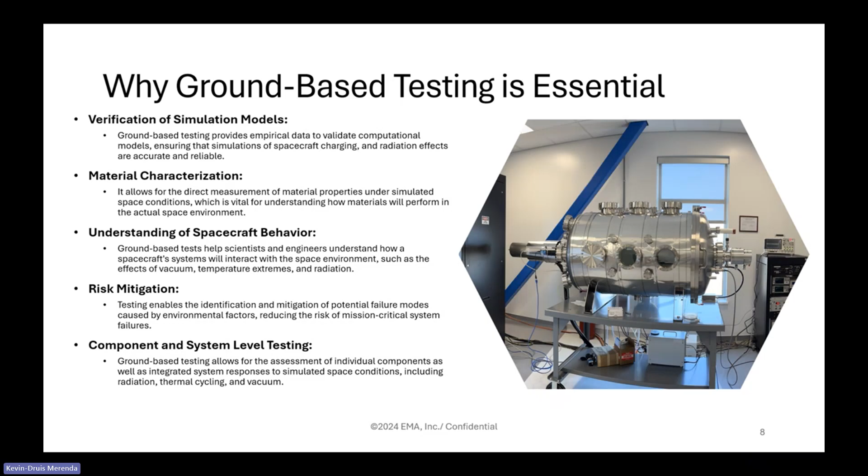There is a cost effectiveness to testing. We know that if we do it in a very specific way, we can assure a certain safety standard, we can comply with regulatory demands, and there's various development strategies that can be done for mitigating the consequences of some of the testing that we have.

So enhancing reliability is key, but it is costly in some way to try to change the design and go back to a test campaign and shine some more particles onto the system and understand how radiation hardening needs to be mitigated.

So that's where I think simulation can become very handy, right? Instead of having testing campaigns of the order of $500,000, we may be able to just do simulation campaigns for $50,000. And that helps us significantly really refine the testing cost of these campaigns and making sure the device can become reliable quickly.

So the key to simulation is that we don't have any limitations on the sample size. We're not destroying the device. We can shine any particles that may be very hard to access in a test facility.

Maybe some test facilities don't even have the radiation environment that you need to be able to test for. Simulation really helps you run all these different types of exposures: long duration, short duration, electromagnetic effects, photons, things like that. Understanding these makes simulation very powerful.

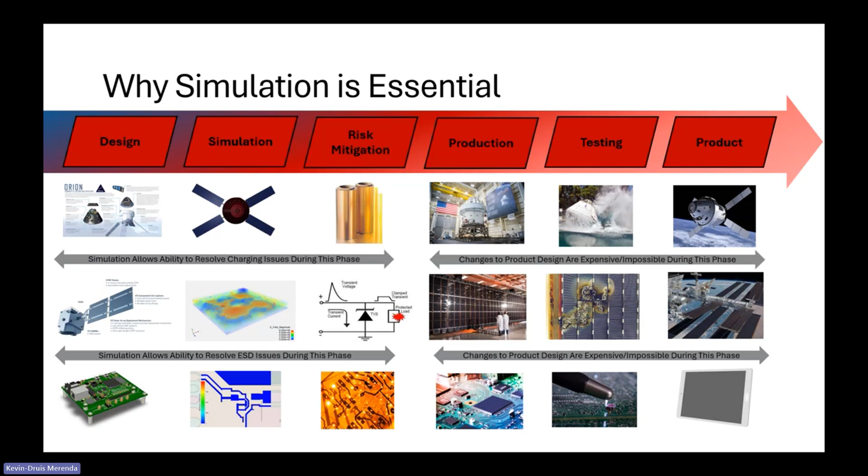This is important if an astronaut is static charged and touching some of the devices, and wants to understand and make sure there aren't any issues under ESD and things like that. So there's a lot that the tool can do to help us solve some of our concerns.

You're probably by this time already very familiar with our partnership with Ansys. Our two tools are distributed through Ansys EMC Plus and Ansys Charge Plus. Ansys Charge Plus is the tool that's really focused on doing this multi-physics of high energy radiation and coupling that to an electromagnetic solver if needed.

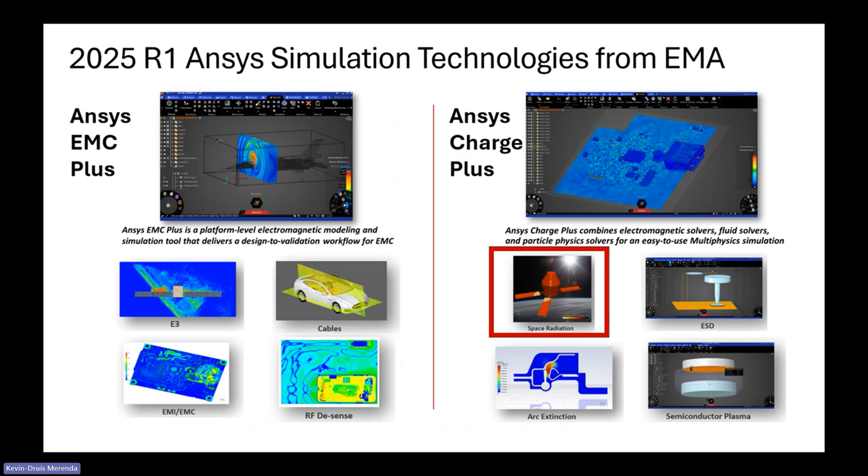This is where the concept of spacecraft charging comes in. We can model the elementary particle physics associated with that high energy space environment, but we can also couple it to electromagnetics to understand the consequences of that higher energy radiation with various components like electronic devices, currents on cables, and fields building up in enclosures exposed to various radiation environments. Being able to have that coupling is key, and this is what the tool was developed for.

One of the things we really wanted to do, because of our very powerful integration with this elementary particle physics, was work very hard at disentangling the FEM and the elementary particle physics so users can run radiation hardening simulations without having to handle the overhead of the electromagnetic solver as well. Even though it's still there as of 25R1 and 25R2 this year, you're now really able to run the radiation transport code on its own, independently from the electromagnetic solver.

That helps us not have as simplified of geometry, as cleaned up meshes, things like that. We have ways to create, as you'll see today, meshes very efficiently and be able to run the radiation transport on much more complex geometries than maybe we were able to do in the past. So it is a multi-physics solution.

You'll find Ansys Charge Plus inside the Discovery tool. You'll see that we have all the tools for prepping the geometry, which is really very important when you get a CAD from your mechanical team. You want to be able to use that quickly, assign materials. All this is doable in the tool, but then also prepping it for simulation is key.

By partnering with Discovery here and having our tool within Discovery, we're really able to leverage that technology efficiently. Some of the cleaning up tools are very mind-blowing and speed up the workflows tremendously in terms of getting simulations ready to go for rad-hard analyses.

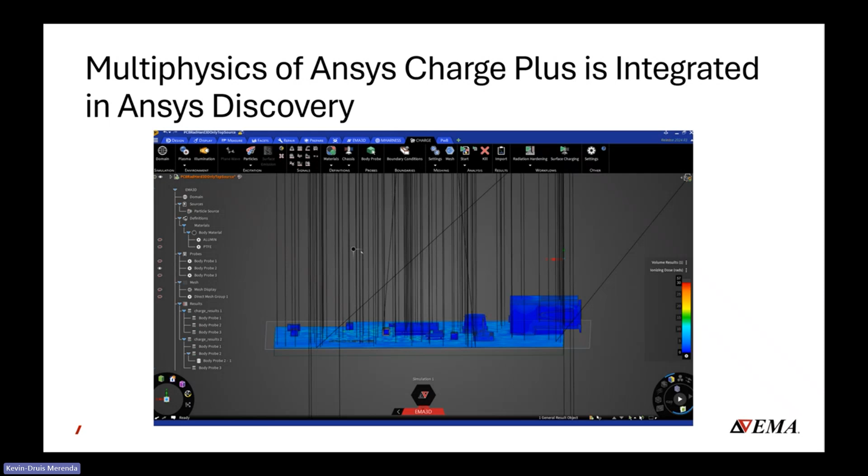Then you go and navigate to the Charge tab, and there you get access to being able to set up many different types of simulations. We have, as you'll see today, the ability to just select the rad-hard simulation workflow, which will really streamline and run the radiation transport code on its own with the new probes that we have incorporated inside the tool.

As always, we have documentation available. We're working very hard to make sure that all the overlay help you get using F1 is updated and very useful for this latest release, especially with all the new tools that are coming. We want to make sure we provide all the help that is needed for you to take on the tool and learn it on your own.

There is a lot in Ansys Charge Plus, so even though you may be using the tool specifically for rad-hard, just keep in mind that there's a lot of other technology inside the tool, and rad-hard problems can become as hard as you want to make them, right?

So if you try to understand how, for example, a photon pulse from terrestrial gamma ray flashes of lightning interacts with an enclosure on a spacecraft, it's going to be much more complicated than just running a pulse of photons from that TGF.

It's going to be coming from, there's going to be aspects of it that create electromagnetic fields. There's going to be gases in your electronics box that you may be considering, because there's plasma forming around the box and inside the box that is redistributing itself based on the fields within imparted by the box, and that will change the whole charging aspect of the components within the box.

And so being able to think of various ways to couple all this physics together is important. It's not easy, but it is doable, right?

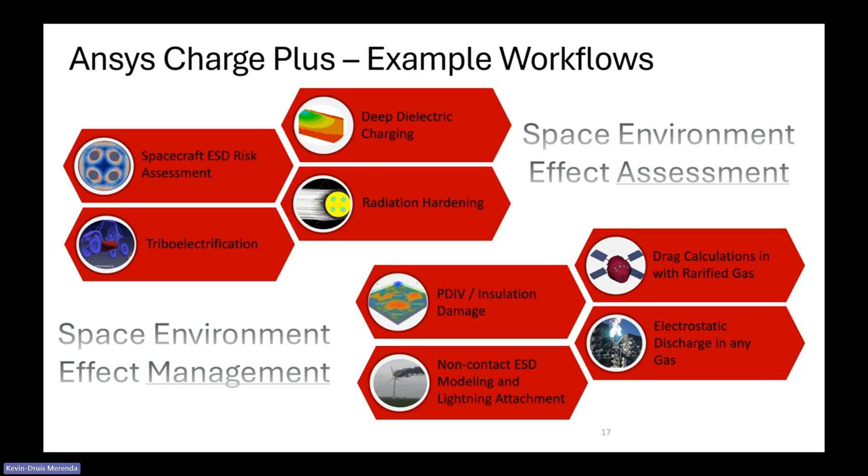How long is it lasting? Are we going to get combustion out of it? Is it going to lead to a full failure? If you need to go that far to make some analysis, we can help with charge as well. Not just assessing if the fields are too high, we can go all the way to modeling the event of the damage as well.

So let me do a little bit of a deeper dive into the difference between radiation hardening and internal charging in Charge Plus. Okay, so the two tools that we're using for internal charging are FEM, electromagnetics.

We have a full wave and a quasi-static solver. Typically for those internal charging problems, we're using the quasi-static solver. And then we have the Monte Carlo transport, which is an interface for G4. Geant4 is a tool that was built at CERN.

It is very well vetted. It's got a lot of different packages based on the physics that you want to retain, based on some new acceleration schemes, or other things present in the tool. And we interface with those packages and can bring them in.

We provide a full CAD interface to run G4 simulation with all the cleaning tools and meshing capabilities, and all the fundamental physics of the electromagnetic interactions of particles with bulk materials are captured in the tool.

We can also use G4 for much more advanced ion interactions and ion particles for the galactic cosmic ray spectrum. This is key, because all the physics of neutron interactions is also captured inside G4. So now we have this inside the tool.

We have a way to couple that information to the electromagnetic solver. Every track that stops inside the mesh will leave a certain amount of charge behind, and we can seed the electromagnetic solver with that charge at any location in 3D. This is how we can charge up any dielectric. We can understand how gases, for example, are charging up due to the radiation transport. There's a lot of powerful things to do.

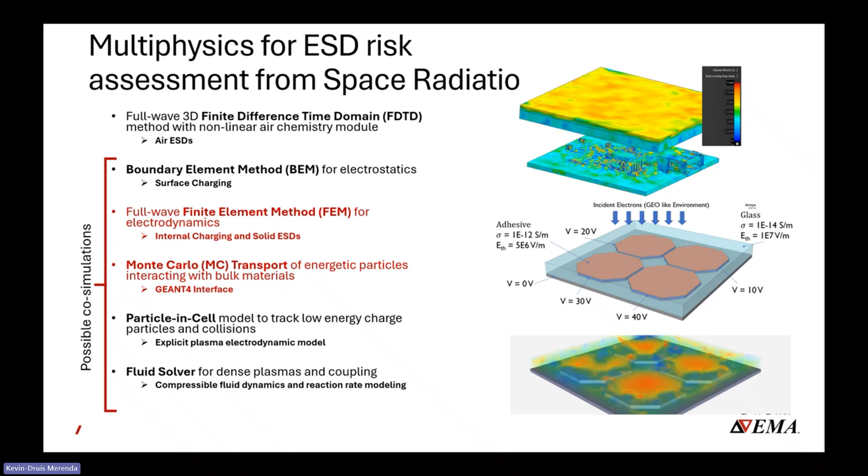For rad-hard specifically, it became important to realize that forward Monte Carlo was not the only way to do rad-hard. There was another tool that is very popular and necessary to do analyses much quicker - the ray tracing solver, ray tracing sector analysis, that we're talking about.

This is doing an analysis, and we'll get a lot more details on how this works from Colin in a second. We are looking at a point on the PCB, and shooting rays across the whole geometry to effectively get the total amount of shielding around the system, all the way to the space environment. Then we apply what's called a dose depth curve, which is a pre-calculated ionizing dose value as a function of thickness of shielding material.

Once you apply that to the system, we can extract very rapidly the ionizing dose all the way down to any parts of a system. But that dose depth curve needs to be generated in the first place, and this is where Monte Carlo particle physics comes in, because it's very important to capture all the physics of that process.

However, there are some assumptions made when you create those dose depth curves. First of all, typically it's done with full aluminum stack-ups, and it's very different when you have materials with different Z numbers ordered differently as well. The true dose depth curve of a problem might not be exactly what you'd get if you were running a full Monte Carlo transport problem.

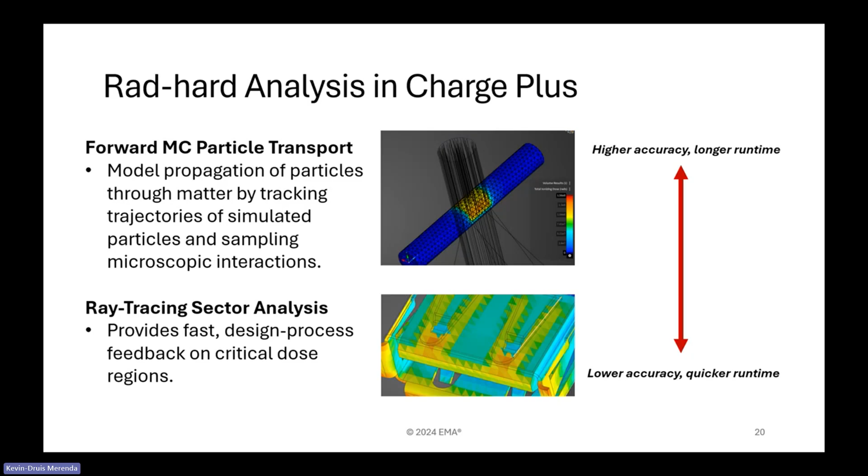It could be non-ionizing dose. It could be done with other types of particles, electrons and protons. As long as you generate that dose depth curve, you can go ahead and use it for the ray tracing sector analysis. But it's a very quick workflow, and a lot of customers are just provided with those dose depth curves to do the analyses and the rad hardening of the PCB. This is a method that is very powerful to get that done.

So very simple, let's start with an electronics box. I promise it's going to get a lot more exciting when Colin takes over, but just for concepts, on how things are working: radiation hardening versus internal charging.

This is a 1 millimeter aluminum shielding box. It has vacuum on the inside, and then it has a PCB board on the inside, just a simple dielectric slab. In this case, I used PTFE. The concept is the same based on the different wall sizes, based on the mesh that we're using. Everything we're about to do is about showing you how radiation works with respect to electromagnetics.

On the left here, we're showing a couple electron tracks, about 1,000 of them, that are shining onto the top of the box. These electrons have a certain energy spectrum. With the Monte Carlo technique, we are sampling from that energy spectrum, and we're sampling the spatial distribution of the source, and applying this onto the system. You need enough statistics to get enough correct information at the bottom. This is by principle what Monte Carlo looks like.

In this case, this is a 4-hour transit in the radiation belts, and we took the energy spectrum from that environment. Here you're seeing a lot of byproducts from that source. You can see that some of the electrons are stopping directly in the shield. Some of them are creating secondary electrons that are making it all the way to the PCB. Then in blue, you actually have photons that are generated as well, and these photons will themselves have enough energy to create some more complex physics. You can see that on the right as an additional track. This will ultimately deposit charge on the box and deposit charge on the PCB.

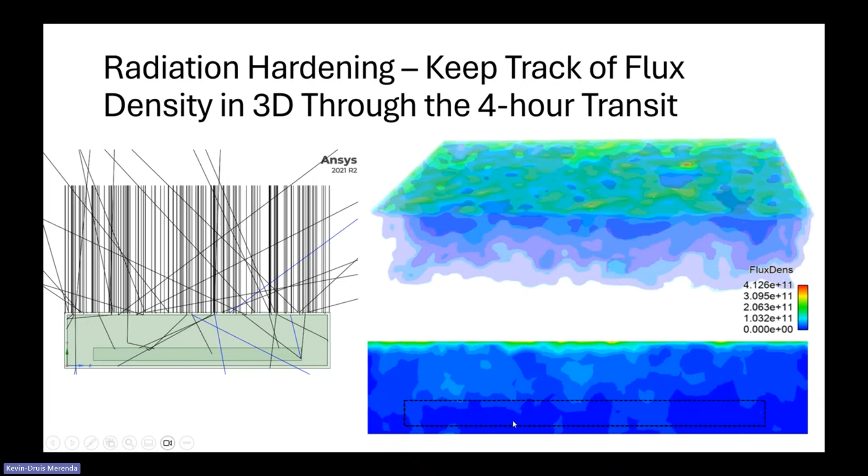You can see a cloud of secondary particles on the inside in blue and purple. On the top is a 3D transparent view, and on the bottom you have an actual slice cross-section of the whole box with the PCB on the inside. So the PCB even adds an additional layer of screening. You can see that we're not really getting any light blue in the PCB itself, and this is due to the fact that the PTFE in the plastic is there and can do additional screening and absorption of the charge.

And you'll see a lot of that in some of what we're going to be showing later in the demo.

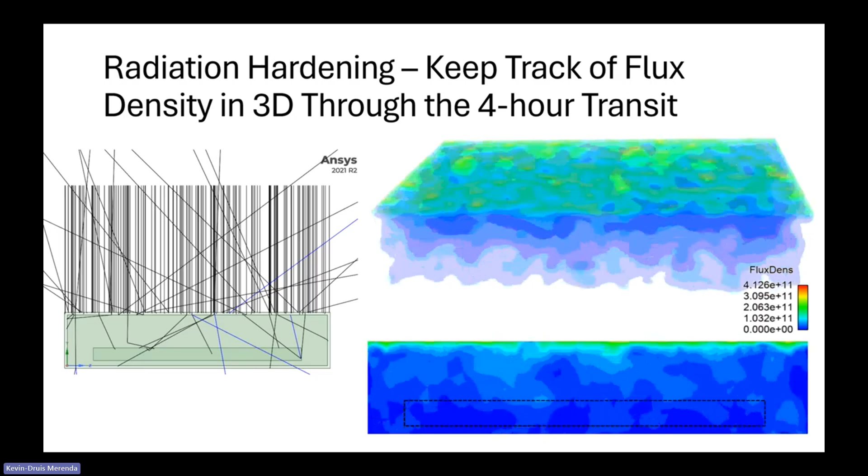Ultimately, with the rad-hard capability, we are calculating dose, just joules per kilo. So we know for each event in our Monte Carlo simulation what energy was deposited on the slab. For typical rad-hard analyses, what we really care about is the total dose for that component. Here, it's the total dose for that PCB, but you could have a separate body on the component itself. And that will tell you if you are within those thresholds that you need to match the standards.

This is showing and breaking this up into pieces where we're really looking at each electron event and the secondaries, making and depositing various levels of energy across the component. This is the fine detail that we extract to actually be able to apply charge to our electromagnetic solver.

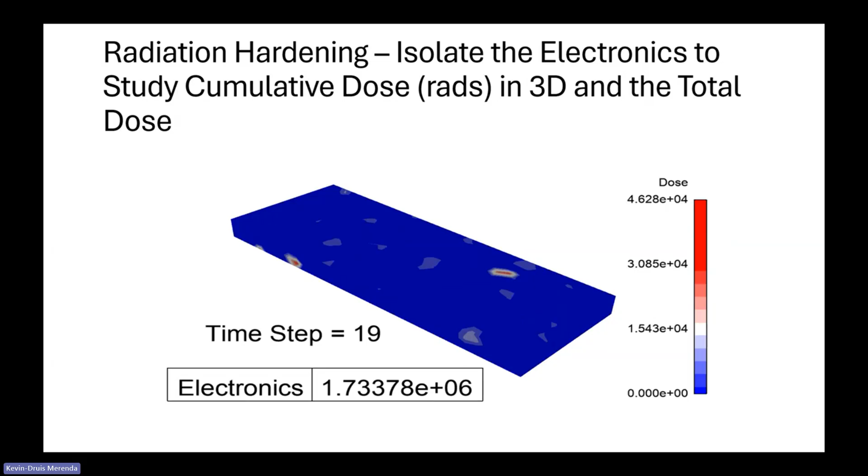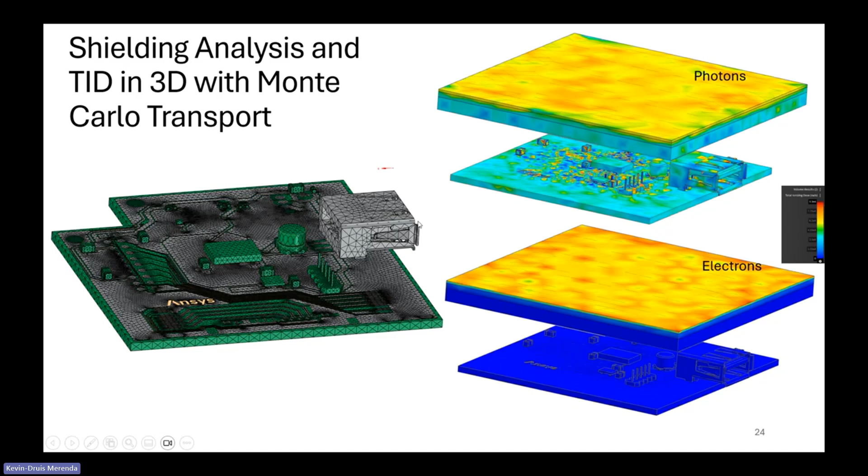Obviously we can do this with much more advanced geometries. You can add additional shieldings, thin layers, things like that. And based on photons versus electrons, you're going to have different levels of radiation reaching the components underneath. In this case, electrons are shielded by this slab in the stack-up, while photons are actually making it straight through to the PCB.

We have various probes to average the information we just talked about. Instead of having it represented in 3D, you can create a body probe and extract that information per body so that you get the actual total dose deposited in the system.

So when we go to electromagnetics, now we have to start considering the spacecraft charging aspects of things and the consequences in terms of E-fields.

As a simple example, we're looking here at a stepped shield. The thickness of the shield is increasing, and as it's increasing, you're getting less charge deposited inside the dielectric underneath. We're setting electromagnetic boundary conditions such that you have a 0-volt ground at the bottom, and the charge is deposited inside the dielectric, and we're seeing the fields build up in various parts of it. This will keep charging, right? This dielectric has a very low conductivity, so there's no way for that charge to dissipate, and you may be reaching thresholds high enough to create breakdown inside the system.

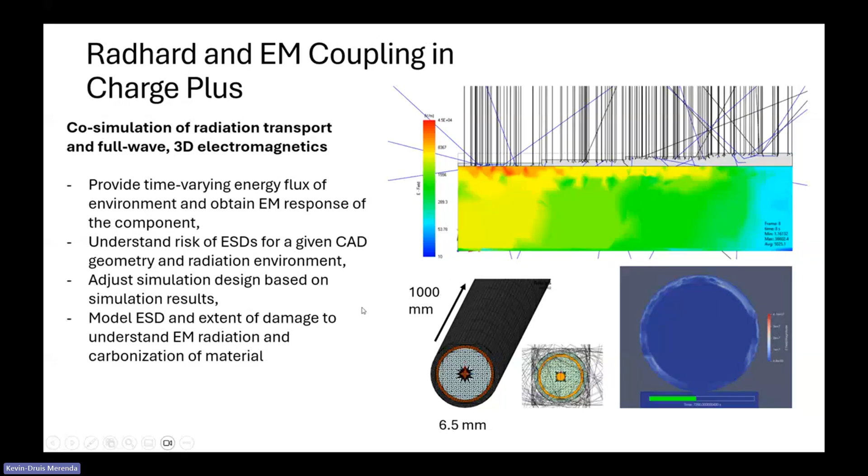So back to our box, what does it look like over time? Here we're looking at the fields building up inside the box due to radiation depositing at the upper layer. And then we can see the charge density in our electromagnetic solver as well, so you can see all the negative charge from the electrons and the image charges building up based on the grounding scheme you have. These fields can actually be coupled back to the radiation transport because the fields themselves might screen the interaction processes within the box.

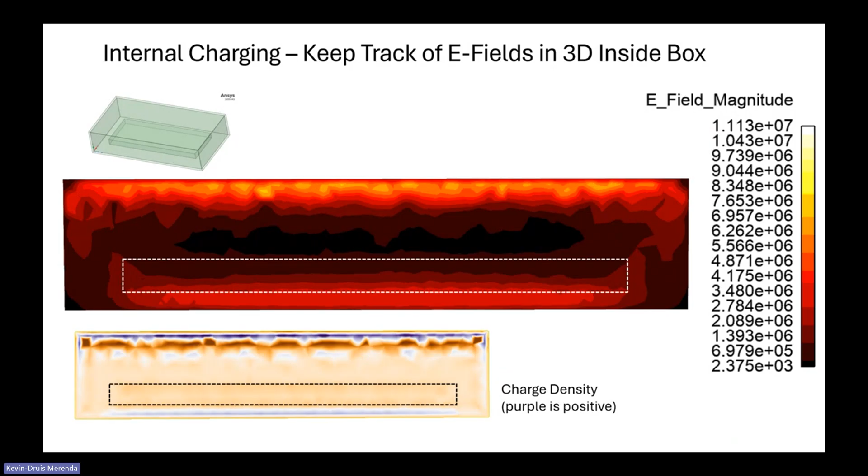The time is very long here in this case, so you may not have the transients on the PCBs, but there's a lot of things to consider in terms of the consequences on the box.

One thing that's important is how do we get these environments? I'm almost going to pass the baton over to Colin - I'm almost done. Those environments can be done from standards.

There are also databases like IRENE that you can use. But a lot of these tools are already accessible within a product called Ansys STK, and STK-SEET specifically, one of the modules within the tool. We've integrated our tool to be able to read in the energy spectrum of electrons and protons from STK-SEET, which makes it a very streamlined workflow, as you'll see today.

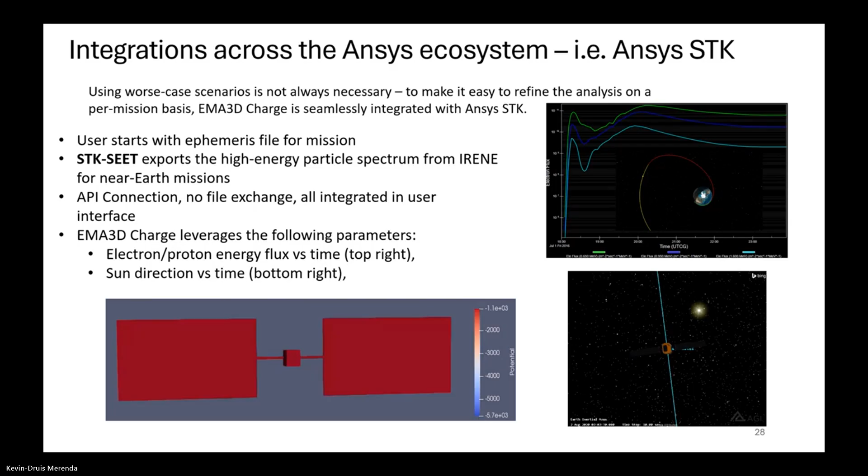I will skip this and let Colin show you a live demo of the process.

I just want to stress that what we're going to be focusing on today is a comparison between our new ray tracing solver that we released within the last year and the full Monte Carlo. The ray tracing solution is very powerful. It is developed on NVIDIA GPUs only, using OptiX libraries made for ray tracing, the same as NVIDIA GPUs use for gaming and ray tracing. So we can run these simulations as quickly as ever. It's a very exciting technology, a quick and easy way to get ionizing dose on any type of complex geometry. So with all that, I'll hand it over to Colin.

Thank you, Kevin. All right, I'll just go ahead and bring this onto the screen. I have some live demo material prepared for us to walk through.

To give a bit of an overview, some of this background has already been discussed, but I'm going to give some context into how the space radiation environment can impact engineering design, in this case for electrical enclosures, and do some deep dive into our capabilities in Charge Plus and our upcoming product Shield Plus for assessing radiation shielding and dose for those types of engineering problems.

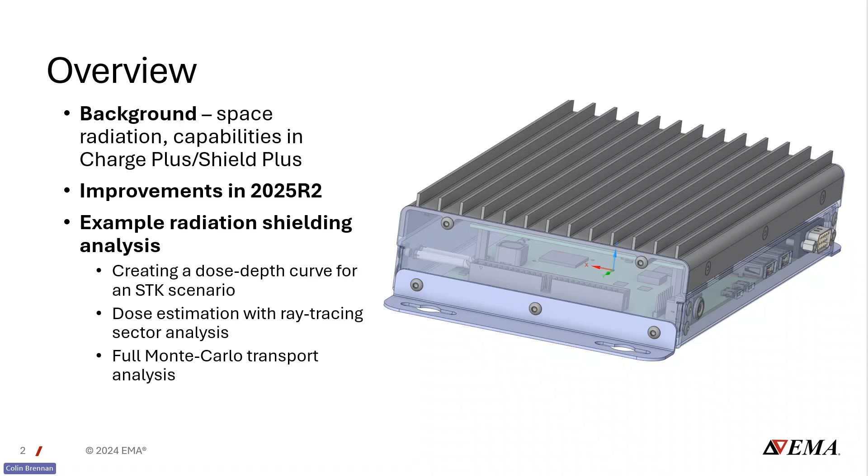Just a quick background, not to belabor the point since it'll be discussed more elsewhere in Expo, and probably a familiar topic to the people in attendance: space is a very hostile radiation environment. There are cosmic rays emitted from distant processes like supernovae that emit very high energy protons and ions, which can cause single event failures in electrical components. Even closer to home, there are solar rays from coronal mass ejections and solar flares from our sun, emitting protons, alphas, and ions. And even within orbit, we have charged particle belts that can also produce chronic dose to electrical components within a space platform. All of these sources of radiation pose significant risk for mission planning and require shielding concerns.

We've already discussed surface charging, but the focus that we'll have today is on the cumulative dose impact.

To put some context on the capabilities we have in Charge Plus for doing radiation analysis, the two main categories are our Monte Carlo transport tool, which, as Kevin was discussing, is a tool where we model the propagation of particles. We track the trajectories of those particles and sample microscopic interactions, things like scattering and ionization. For charged particles, that'll be continuous slowing down, depositing energy along its track. Because this is a statistical method where we create simulated particles and track them all individually through our design, we have to run a large number of these particles to get a good convergent solution. For very complicated geometry with very small features, this may be on the order of billions of particles.

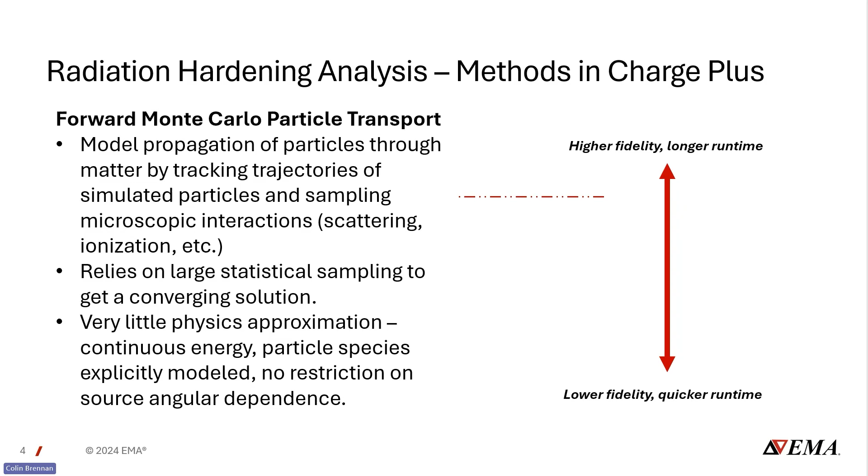Here on the right, I have this kind of axis between a high fidelity simulation method with a longer runtime, as opposed to something with lower fidelity with a quicker runtime, and transport's going to sit on the higher fidelity side of that axis. Then to put in context, our ray tracing analysis option sits as more of an approximation tool, but with a much faster feedback loop and runtime. The idea is that for isotropic radiation environments like we have in space, we can do a pretty good job of estimating dose just by tracing rays from a point.

That might be our sensitive component through our design, and we compute the total shielding encountered along each of those rays, then interpolate that into a known curve to get a contribution to dose.

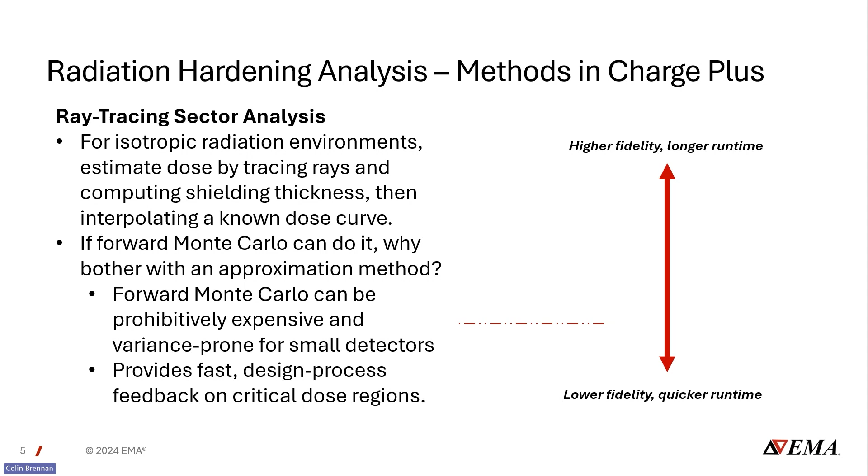So the question you could ask is, if we can get this dose information by just running Monte Carlo and looking for energy deposition, then why do we need approximation? Why do we need ray tracing? This axis kind of explains it. Monte Carlo can be pretty expensive to run, especially if you have very small features which you need to collect good statistics in. If you're in a design process where you need to quickly evaluate the impact of certain design changes, you don't want to sit for 24 hours for a Monte Carlo analysis to run. You'd much rather sit for a few minutes for a ray tracing analysis to give you a pretty good idea. And there are programmatic requirements for designs where ray tracing analysis is sufficient for satisfying a dose characterization. In that case, let's use ray tracing—it's much faster.

Kind of the inverse of that question is, if you can get good dose estimates with ray tracing, then why bother waiting for Monte Carlo? I think that's a very good question. Monte Carlo, being a pretty good recreation of the underlying physics, lets you explore more questions than you can answer with just ray tracing alone.

Because we're simulating the particles explicitly, we can tally more than just dose. We can find out things like what is the linear energy transfer in a component, what is the total charge deposition, what is the fluence of particles someplace in the design. And then you can also tally energy spectra—not just what is the fluence of particles somewhere, but what is the spectrum of particles traveling through some region of space. All of these things are pretty powerful and let you do much more advanced analysis than you can do with just ray tracing alone.

And one of the fundamental limitations with ray tracing is it assumes that a dose contribution along any given direction from your component is just from a straight-ahead assumption—that dose from that direction is just due to shielding in that direction. From our understanding of particle physics, depending on the particle species and depending on the spectra, that's not a completely terrible assumption. But there are definitely particle types and energy ranges where that's not a very good assumption at all.

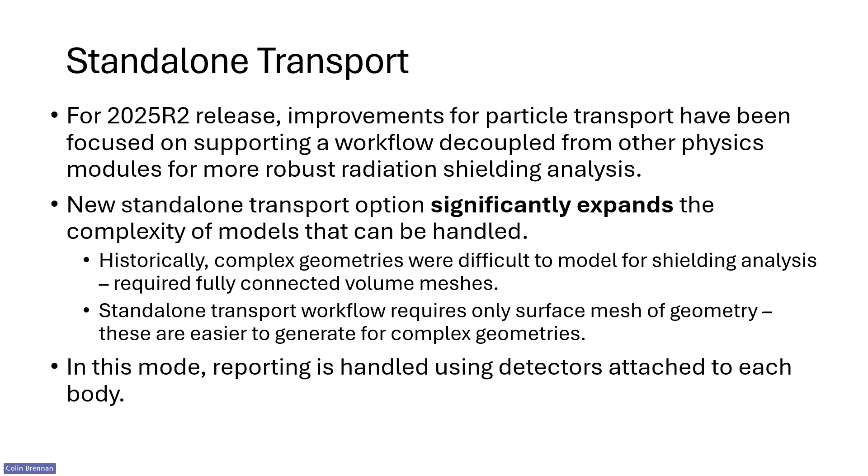Something we put a lot of effort into in the past month or so is allowing you to actually visualize those per body results in 3D, so it's a bit easier for you to notice, for example, trends. We'll go into a bit more detail on that in the live workshop part of this.

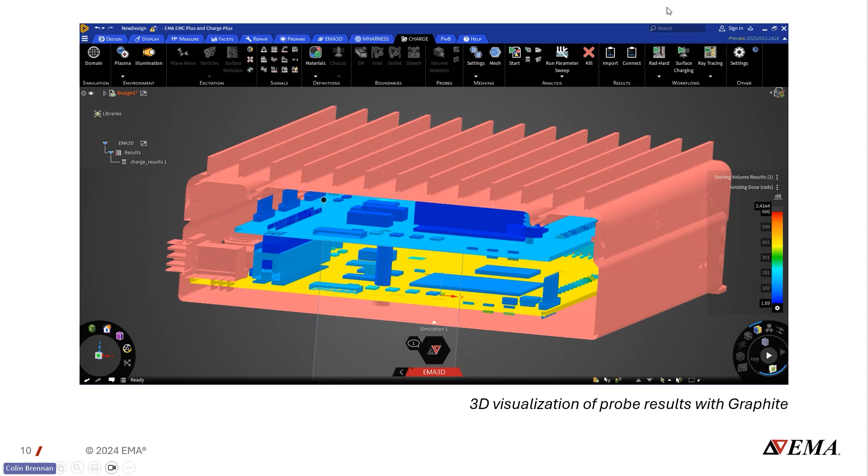So for the remainder of my time, I'm going to focus on an example analysis for that enclosure I showed. We have this enclosure, and we're going to be exposing it as if it's on the exterior of a satellite in a geosynchronous orbit. This is probably not an enclosure you would want to put under those conditions for a variety of reasons.

It has some pretty exaggerated vulnerabilities that we've included for the purpose of showing how this analysis might be useful. Some of those things are pretty large gaps in the wall of the enclosure. We've chosen a lower density plastic for the walls. And then there are exposed connectors along this side wall of the enclosure that produce streaming paths for particles to get in, and the connectors themselves are exposed. So for many reasons, this is not a good enclosure for putting on the exterior of a chassis, but it's great for showing the advantages of doing radiation analysis with our tool.

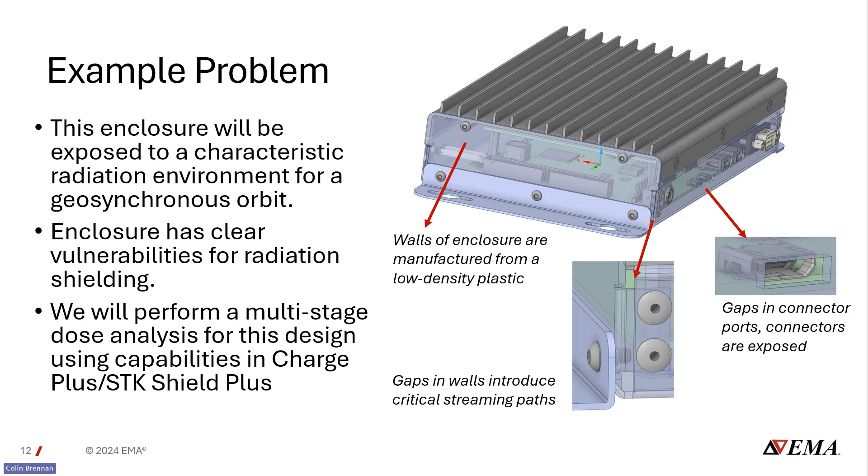So let's see—I'd like to start with ray tracing.

The key input for ray tracing is a dose depth curve for the given radiation environment you're interested in. That can come from different places. For a lot of our validation work, we've pulled those curves from tabulated data from the DSNE, the design specification for natural environments from NASA. Sometimes these come from program requirements or design requirements if you're developing a subsystem. And we'd like to highlight that you can also generate these with our STK integration if you have some atypical orbit or mission scenario.

So there's a two-step process: one, we need a dose depth curve, and two, we need to do the ray tracing analysis. We're going to start with seeing how we can make a dose depth curve with Shield Plus.

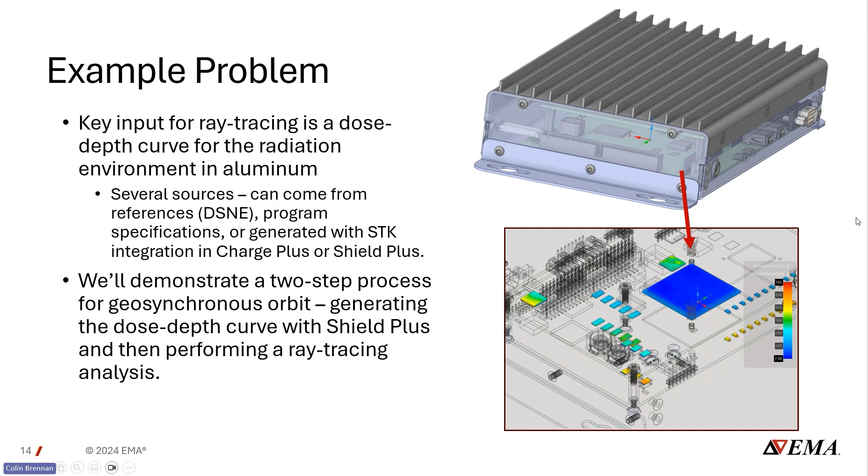I have a screenshot here, but I think I'd like to just step over to the software and show you how this works. Is STK showing up okay on the screen share? Yes, I hope so. Okay, sweet. So this is Ansys STK, if you're not familiar.

It stands for Systems Toolkit. It does a lot of things, but our integration with it is very focused on being able to pull from the SEET radiation tool to get particle fluences and energies for electrons and protons for a given ephemeris.

For a very simple example, I've gone ahead and prepared a geosynchronous satellite. If I press play here, you can see it's geosynchronous because its orbit matches the period of rotation of the Earth. That was prepared just by going into the orbit wizard, where you can create a geosynchronous satellite. So that's the one we're working with in this case. I did not mean to create a second satellite.

Shield Plus is our new product that we'll be releasing. I'm not sure exactly when it's coming out, but it's within the next couple of months. What Shield Plus provides within the STK interface is these plugins that allow you to do a number of different analyses with the charge solver and the EMC Plus solver. There's one for setting up a radiation hardening problem where you have a stack up of layers, and then there are a number of others, like a lightning strike probability workflow that I know very little about.

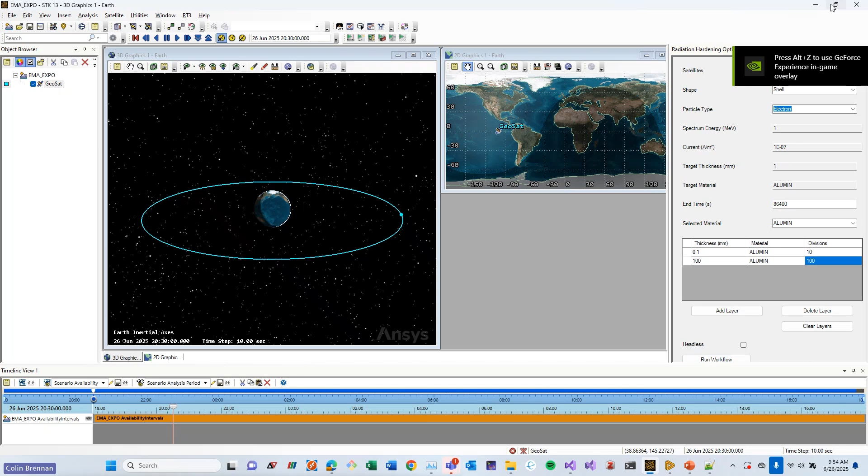If we give that a couple of seconds to launch, once it's open it will create the geometry we specified, pull in the particle spectrum for this orbit or satellite, and run a Monte Carlo transport simulation to get the dose depth profile through that concentric set of shells. It's taking a second to launch—might not like that I have another instance of Discovery open for the second half of this. Oh, no, there it is.

So yeah, while that is going, I can show you—whoops, probably not from the beginning.

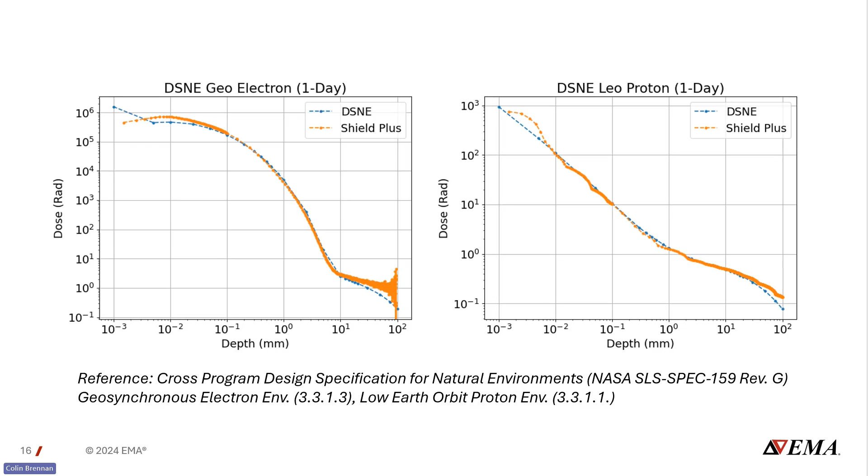So, kind of as I was going through that discussion, Shield Plus has opened up. When you launch it, it will warn you—you can just click through. What it's going to do now is generate all of those shells, assign them to be aluminum, and then start a dose depth simulation. In the interest of time, I'm not going to let that simulation run; it typically takes 1 to 2 hours to complete the analysis.

So you can see it really is as simple as setting up a bunch of concentric shells—big, it looks like a big sphere.

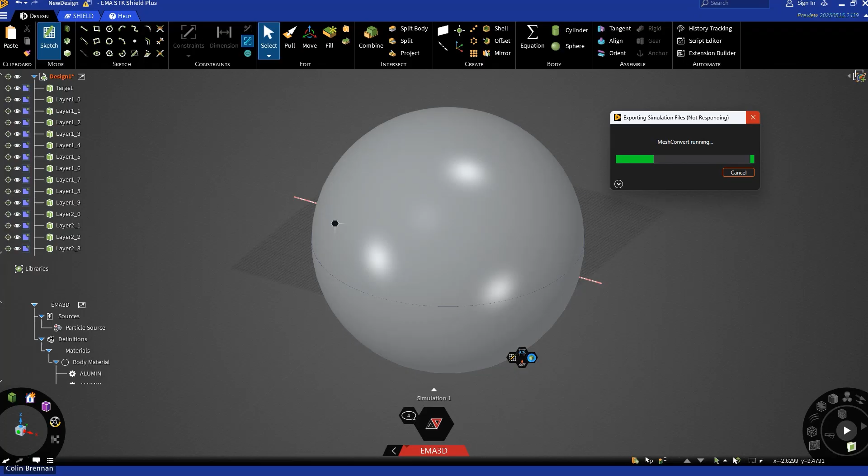It's doing a lot of processing at the moment because there's a lot of bodies in this model. Just give it a moment. I guess there's not much to discuss while we're waiting for this.

In the interest of time, I might just jump over to ray tracing because we have about half an hour left. Assuming you let that simulation fully run its course, you'll have a dose depth curve, which you can now use as an input for ray tracing.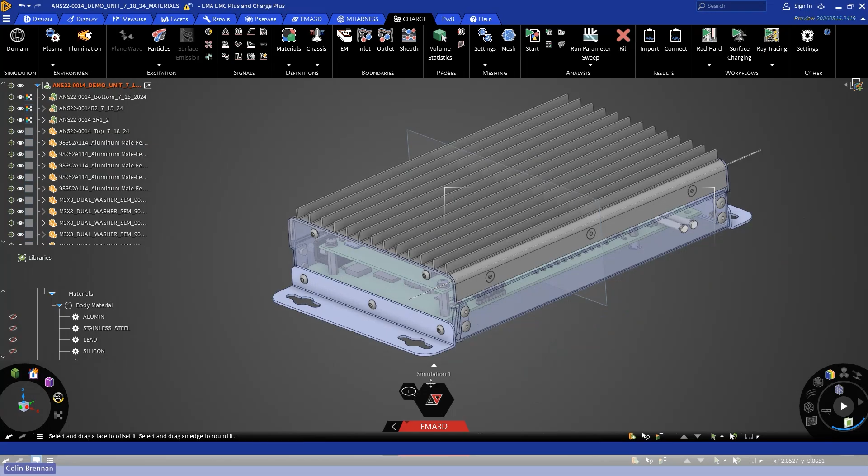So I have this model, showed it previously in the slides, but this is an enclosure. It has an aluminum lid, a plastic wall that we'll be applying. And if I go ahead and hide some of this geometry, we can look at some of the internals.

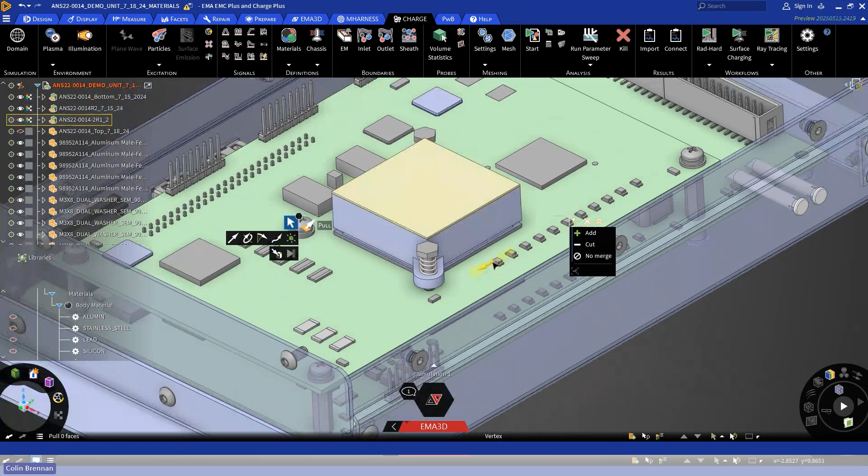So there's a number of, an array of transistors here on the top board as well as on the bottom board. We have in here a chip inside of kind of a box for shielding. On top of that, we have a lead layer to provide additional shielding for that sensitive component. Then a number of other components here that may be present in the design, just coming from your mechanical team.

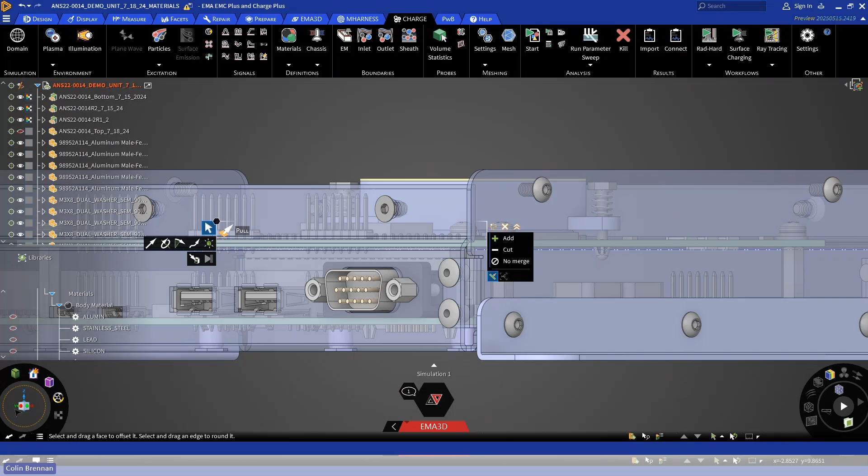I previously highlighted some of these vulnerabilities—for example, these holes here on the sides. As well, if we click over to the right side, we have these connector ports that, if you zoom in, you can see have some substantial gaps that can provide streaming paths for radiation to come in, and these connectors themselves being exposed is somewhat problematic.

I've already gone ahead and assigned materials for this model. I'll show you how to do that for a few of the bodies, but if we go through and look with inspect materials, we can see some of the materials assigned. I've assigned lead to this thin patch on top of this box on this chip for shielding. There's polyimide on the boards, stainless steel on some of these fasteners, and most of these components are set to be silicon.

To assign materials in charge, you come in here and create a new body material. For example, let's bring back the lid.

If I wanted to assign aluminum to some of these components, I can go into our material library and select aluminum. If you have materials not present in the library, you can come in here and enter them for both the transport and ray tracing analyses. The only parameters that really matter are the atomic mass, atomic number, and density.

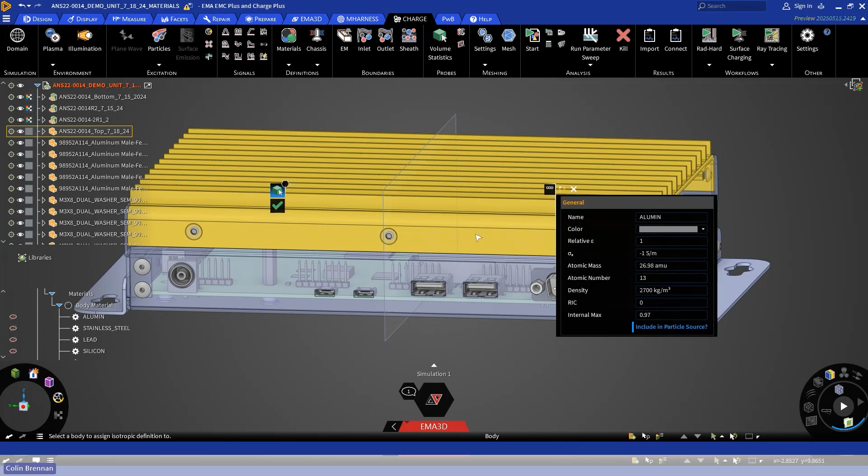So I have aluminum present here. I can go ahead and assign it to some of these aspects of the enclosure. It's as simple as clicking on them once you're in this tool, and then to save changes, you just click the check mark.

I went through that process ahead of time because for this many components, it takes a little bit of time.

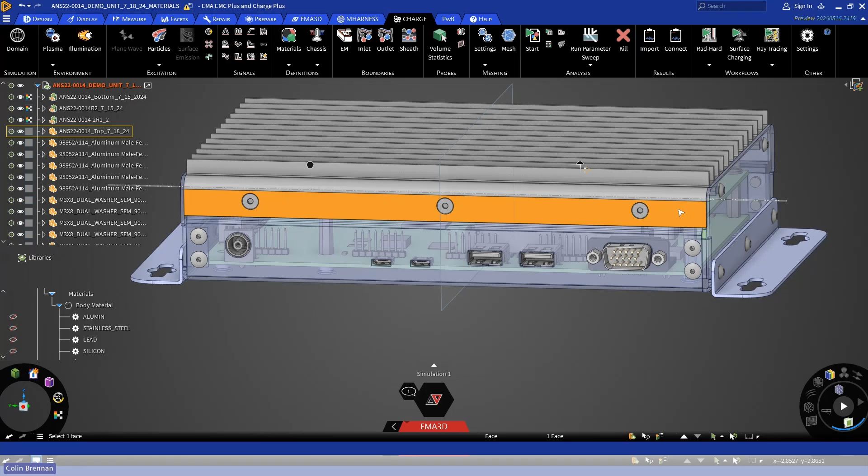For ray tracing, the only thing you really need to do is go ahead and assign detectors. So I can hide this lid again so we can see some of the components, and I'm also going to hide the walls and these boards just so it's easier to see what we're doing.

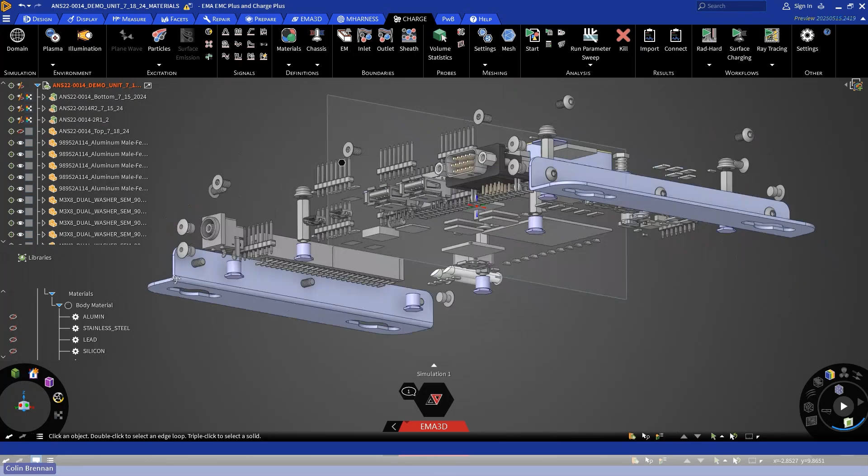I've already gone ahead and selected a few of these components we'd like to do comparisons for, so I'll create detectors for those. Everything for ray tracing is controlled on the charge side through this button and its corresponding dropdown. You can create materials here, as well as assign detectors.

For ray tracing, when you select geometry for your probe, we create a tessellation of that surface and do ray tracing from all of the points in that tessellation. So it's very straightforward to create samplings over an entire device, for example.

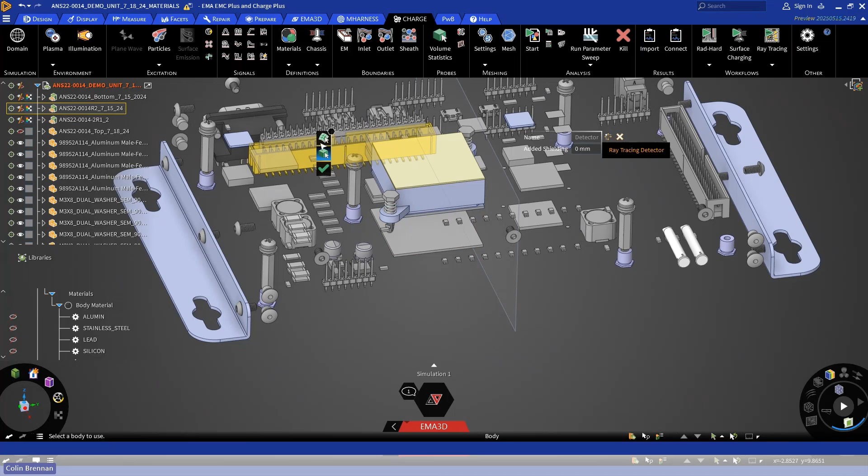You'll see here on the left of the tool, we have a body selection mode and a surface selection mode. I think most people will want to use this body selection mode. The way it works is you just click on the bodies you'd like to create samplings for.

Actually, did not mean to do that one. I'm going to work through the ones I had pre-selected. So I'm picking some transistors on both the top and bottom boards at the ends of the arrays. I'm very interested in this chip, which has a lot of additional shielding just for it, so I'll click on that guy. And just to round things out, there's a couple of other chips I selected as well.

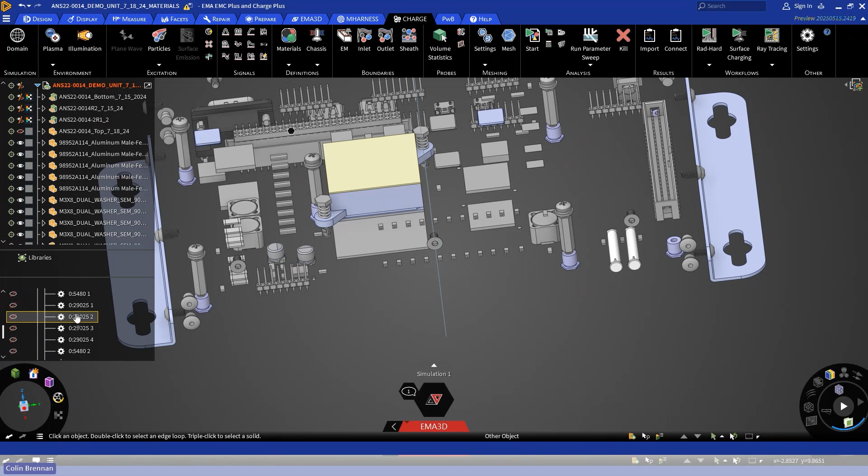So I'll hit the check mark, and we've gone ahead and created probes for all of those. When we go to do ray tracing, we'll create a sampling over all of the surfaces of those bodies and do ray tracing from them.

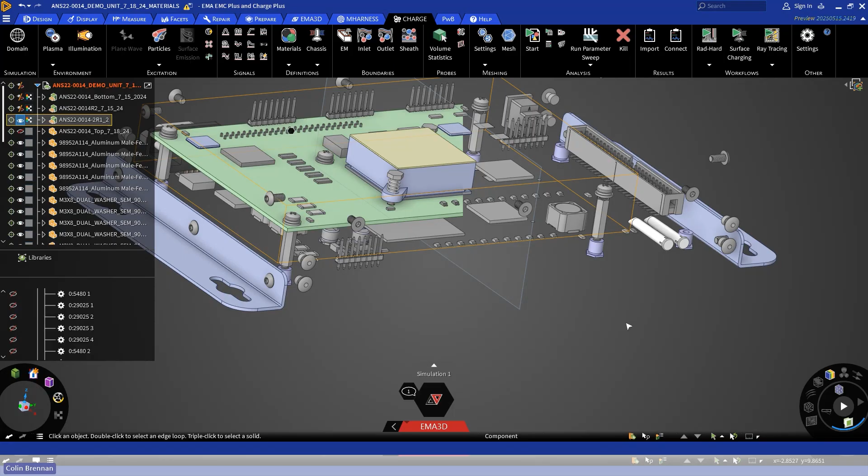Another thing you can do is actually use the CAD tools in Discovery. So I might bring this back in for a moment. Not that - never mind, I wanted the walls back, but I think I can do this anyway.

If we zoom in, I mentioned those holes in the corners of the enclosure. I'm interested in what dose is in the vicinity of those holes, so I can go ahead and create a surface detector.

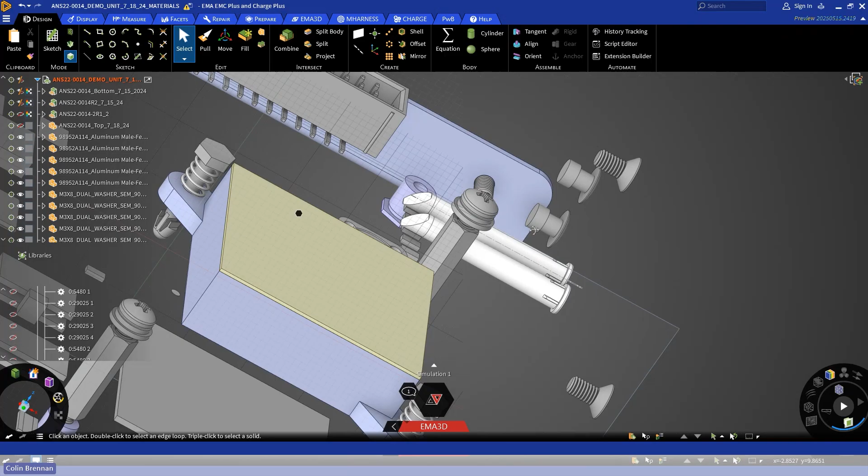I'm just going to use one of these planes out of convenience to sketch on. The rotation is a bit weird - there we go. I'll prepare kind of a rectangular shape. Oh, this is strange, it's rotated in a way I wasn't expecting. Maybe I'll try this differently - maybe easier if I bring this back. Is this what I want? There we go, yeah, I wanted the walls here.

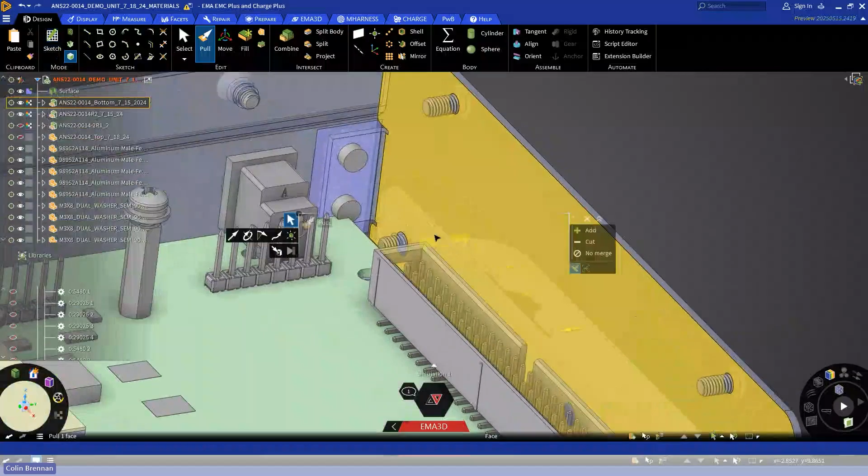So as I was saying, I'd like to do a sampling in the vicinity of these holes to see to what extent it enhances dose in the neighborhood of it. In the interest of time, I'll just do one of these. In the slides, I'll present a couple of additional ones on both sides of the enclosure, and one in the plane of one of these ports, and we'll look at those results when we go back to the slides.

Oh, I didn't mean to extrude that. I meant to move it. I'll just move that a little bit offset from the geometry.

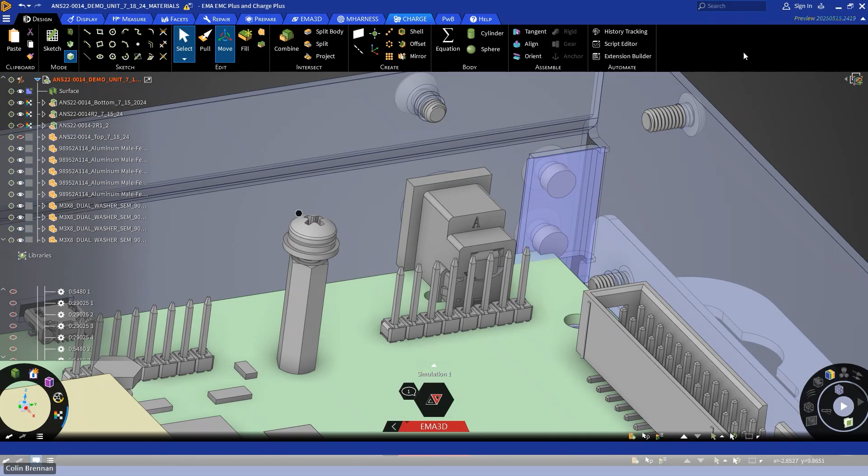Then if I go back to the probe tool, in surface mode, I can go ahead and select this surface and assign a detector to it. It will create a sampling across that surface and give you a nice dose map over that surface, just the same as the surfaces of those volumes.

For ray tracing, that's really it. At this point we can click into the ray tracing control and set a couple of the main options. The main parameter is just the number of rays you'd like to sample for each point in your tessellations. I'll just leave it at the default.

And then you can import your dose depth curve. Let me show you what that file looks like. These files will be prepared automatically if you run things through Shield Plus, but if you're pulling them in from other sources, it's just a 2-column file of depths in aluminum in meters, and then dose in rads. If you have some other quantity you're doing ray tracing for, just express it in those units. These are pretty straightforward to prepare. This one is taken directly from the DSNE.

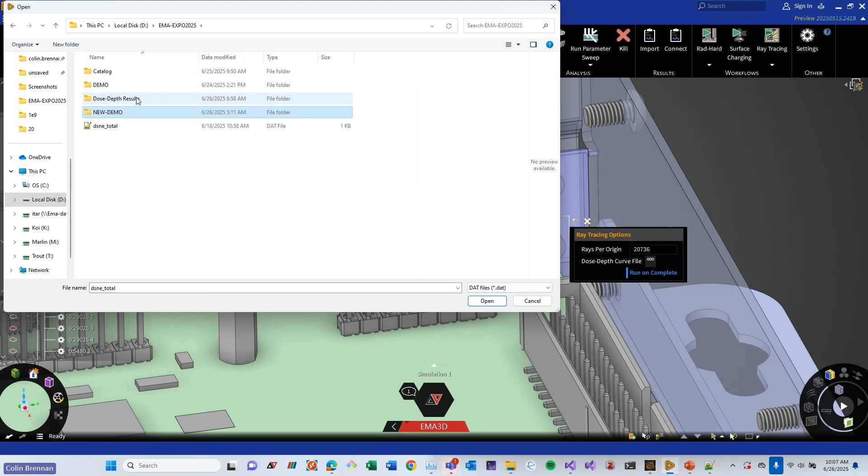I also have one that was produced with Shield Plus for the geo environment, and in this case we produced a much greater sampling in depth. I did the testing with the DSNE dose depth curves, so I'm going to stick with that.

And then for ray tracing, we just click go. I'll let this run through because this analysis will only take 1 or 2 minutes. As we discussed, this ray tracing is being performed on the GPU using an NVIDIA framework and hardware, so we're able to trace a very large number of rays every second. I think this one ends up being on the order of 100 million rays, and we should expect this to take about a minute or two.

While this analysis is running, we can see some output from the solver. It's already finished one of those surface tessellations, and it's moving on to the next one. This will just kind of chug through.

While that's running, we can take a look at some of the files that generate with the simulation. You'll get some files associated with the actual surface visualization that we'll look at once the simulation is done. We generate track files for all of the least shielded rays, on a per detector basis, and I'll show you what those look like as well.

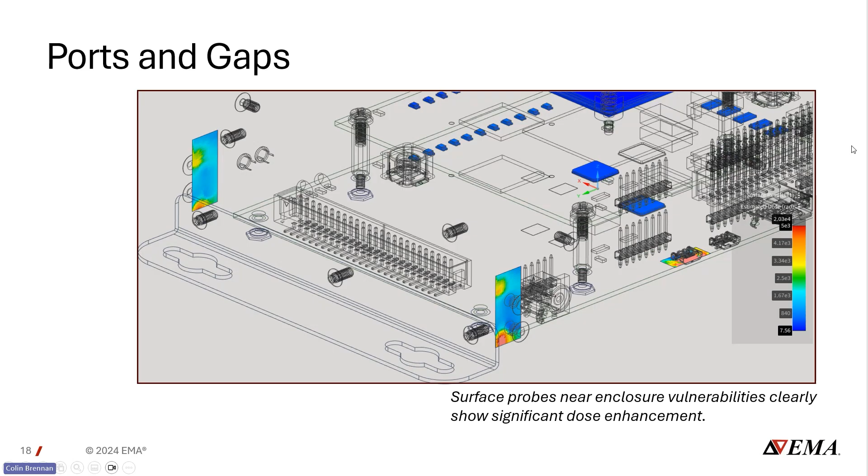Something else I'll be able to show you is our track rendering. So something we also output from ray tracing is all of the least shielded rays from a given detector. And then you can pull those into Discovery to take a look at them and see where your vulnerabilities are in terms of shielding thickness.

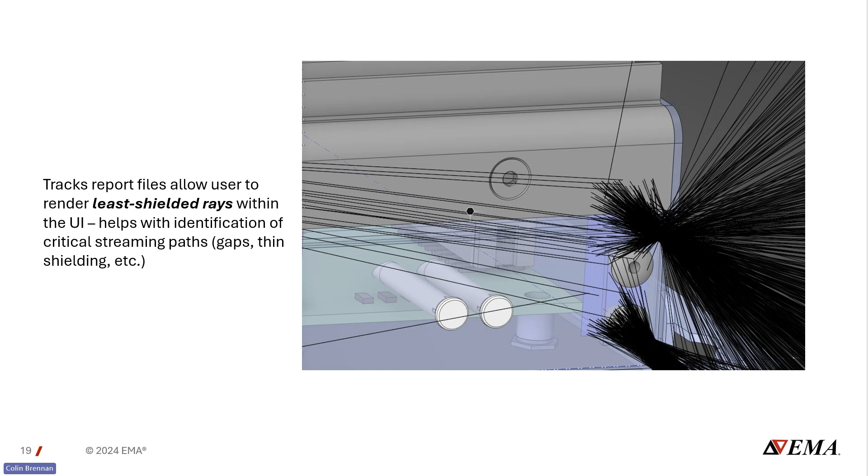In this case, it's pretty exaggerated because we have this detector right next to just holes, and all of those least shielded rays are going straight through those gaps. So for this exaggerated case, it helps you find ports or gaps, but in less exaggerated cases, it can help you identify where it might be useful to add patches of shielding, for example. And I can show you how to do that as well.

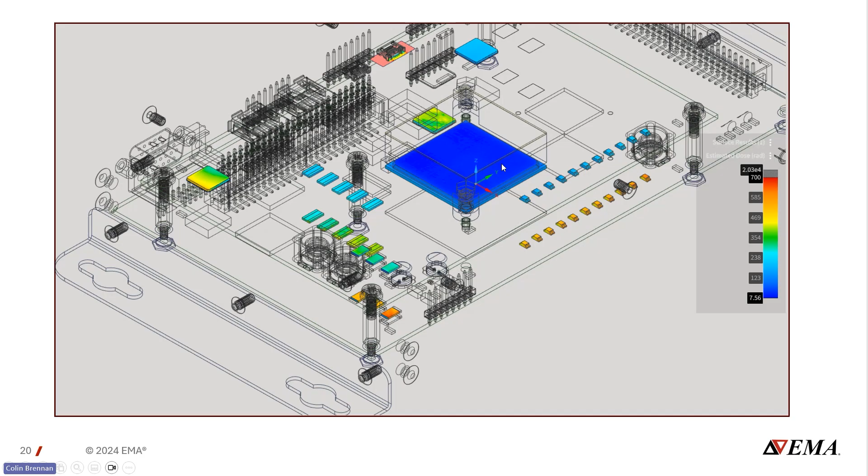This is what the rendering will end up looking like in just a moment when we're done. You can see we get much higher dose on this bottom array of transistors than we do on the top. And then it seems like our shielding has accomplished what we wanted for this chip underneath this lead shielding patch.

Okay, yeah, ray tracing is done. You can tell because it says ray tracing completed and it says check-in succeeded.

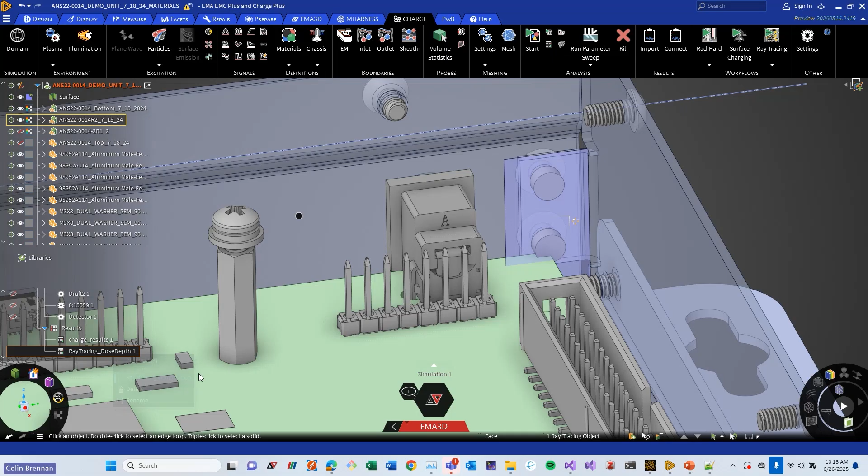Once the ray tracing analysis is finished, you'll get this node down here in the tree that allows you to do 3D surface visualization of your results, and you can see these surface maps. I had the transport results preloaded.

So yeah, like I said, you get this significant enhancement of dose near the gaps in the enclosure, so much so that it completely washes out the color scale for the other parts, so we'll have to adjust that. We'll bring this down to about 600 rads.

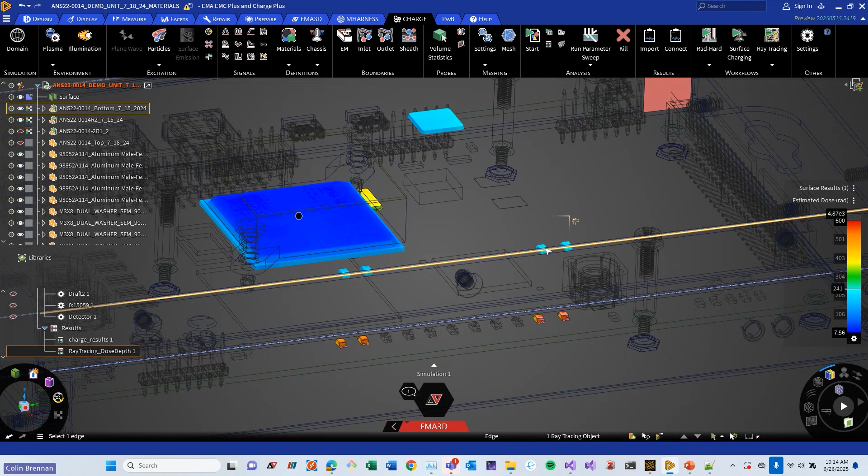And we can start to see kind of the same observations I showed in the slides. These transistors on the top board are seeing much lower dose than their cousins on the bottom board. This is just because, one, the walls of this enclosure were arbitrarily set to be a lower density of PTFE material. And then also, these transistors on the top are shielded from below by 2 boards instead of 1, so in general, they're much better shielded than these transistors.

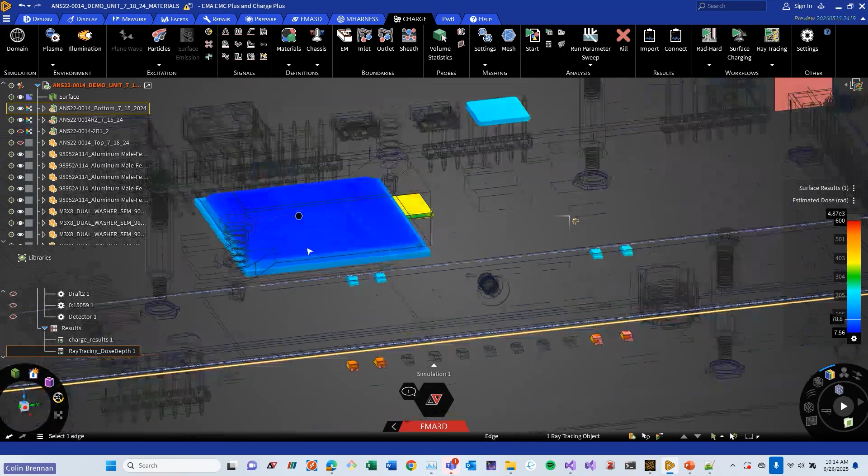You'll see also, we'll reduce this color scale even more to exaggerate. Most of the dose that's being deposited on this chip is actually just on these sides that are not shielded, compared to the top surface. Somewhat interesting.

And yeah, in the interest of time, I'm going to move on to the transport results.

So yeah, complementary to our ray tracing option, you can also do Monte Carlo transport to get a more high fidelity picture of dose deposition in your parts. The setup for this is very similar: you create your material definitions for your CAD, and then really most of the work then is just defining your particle source, the conditions of your radiation, and then maybe some of the additional transport physics parameters.

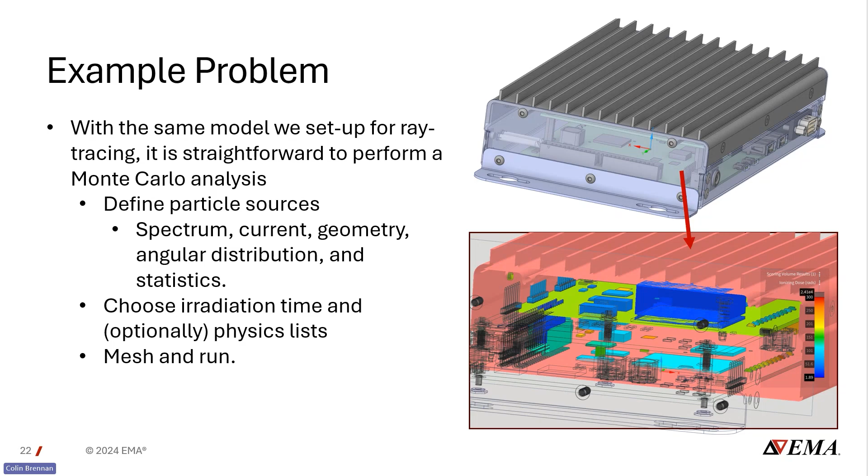That's just going straight back over to Discovery to set that up. I'll go ahead and delete this surface because we don't need it anymore, and bring back the full geometry. Because all the materials have been assigned already, all we need to do is set up our particle source.

You have a lot of options for setting up particle sources in Charge. For this workshop, we have a geo-electron example already built in that you can set up. So if I just click that, it will create for me a geosynchronous orbit electron environment, and that's specified by the integral energy spectrum of the particles and fluence. This is pulled, I think, just directly from the DSNE as well.

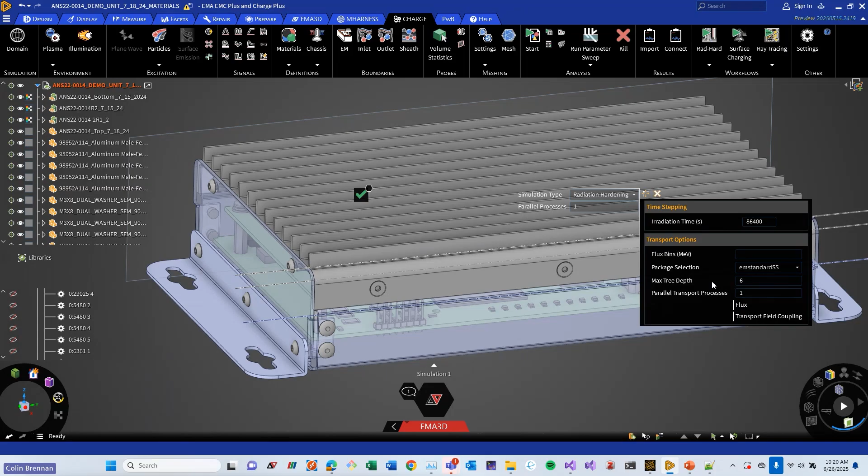There's some options you'd like to set in the domain as well for radiation hardening. For this standalone decoupled option we've been discussing today, all of that is controlled within the radiation hardening simulation type, and there's only a few parameters for that. You give it an irradiation time, very straightforwardly. And then you have a couple of options for the GEANT simulation.

The main one you might tweak is your physics list selection. GEANT provides a number of different, for example, EM physics lists that do a better job of handling low energy electrons and photons and so forth. And if you have hadrons, like ions or neutrons, where nuclear reactions and nuclear scattering are very important, you'd want to use this FTFP Bertini cascade physics list. But we're working with electrons, so we'll stick with the EM standard SS physics list.

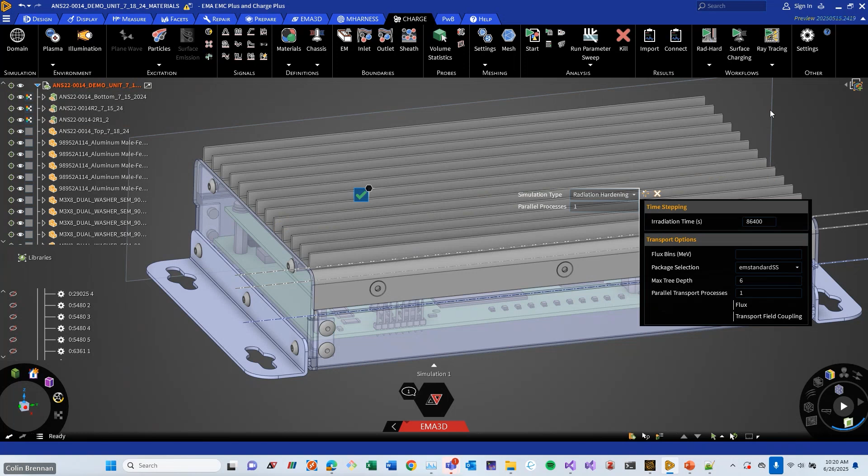I had discussed the meshing for the standalone transport. You have two surface mesh options. One would be facets, where we just take the rendering facets and directly use that as a mesh. This works relatively quickly because these facets are already generated just to produce this rendering you're seeing right now, and so I tend to favor it for that reason.

We also have the option to use the built-in Discovery Artemis meshing, which uses Ansys's meshing options to produce a surface mesh, and you can use that for standalone transport just the same. For the demo, I use the facets because they're quicker. I think I actually already have the mesh loaded, so I won't go ahead and wait for it to mesh. Come over here.

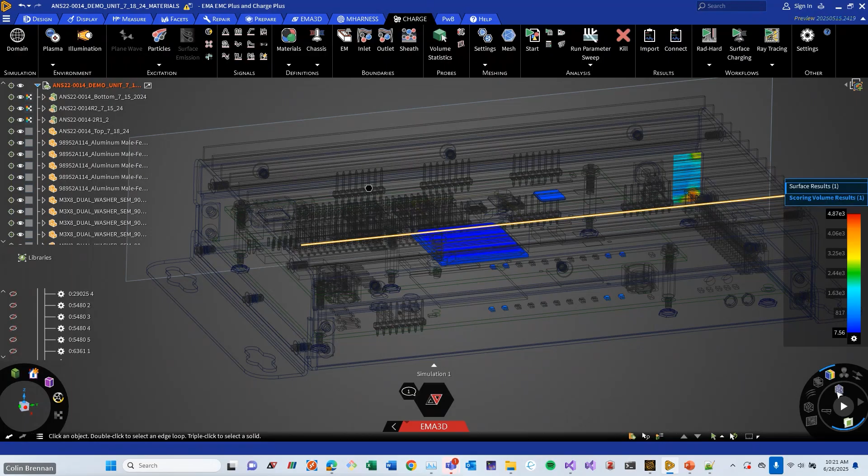There we go. So this is what that mesh ends up looking like for this geometry. In the interest of time, I'm not going to go too deep into it, but kind of give you an idea of what kind of mesh you can expect to get. You can actually use this cut plane option to look inside of the geometry and see what the mesh looks like on each of those components. And we may take a look at that when we look at the results.

So to recap, we had to assign materials, we defined our particle source, we chose our meshing option and irradiation time, and that's really all that you need to do for the standalone transport simulation. At this point, what I would do is click Start, which would launch a simulation that would run for 40 hours, and so I won't make you sit through that. Instead, I'll just show you what the results of that simulation look like, which I already have loaded.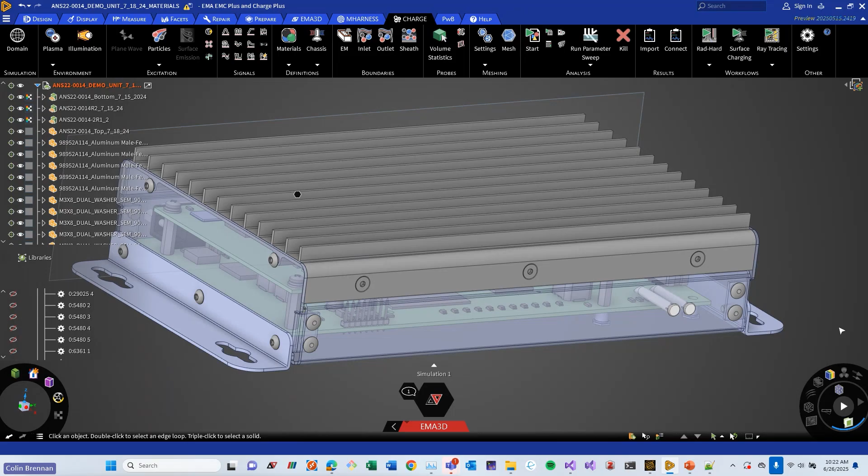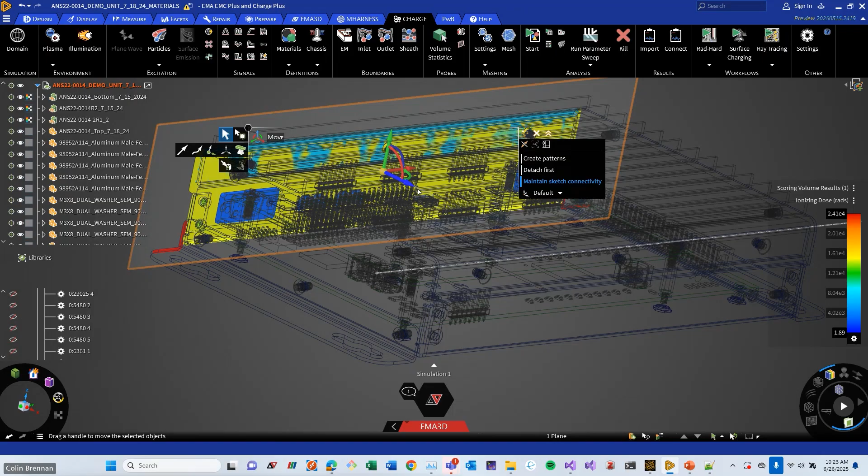So what we do is construct this rendering, a color scaled rendering of your probe results. You can actually use this cut plane to kind of look inside and see the dose and various quantities on each of your components. The rendering is a little slow to update just because there's a lot of mesh elements here. So maybe if I rotate this about 90 degrees.

Oh, I think I was selecting the wrong thing there. Okay, well, in either case, I have some screenshots I can show.

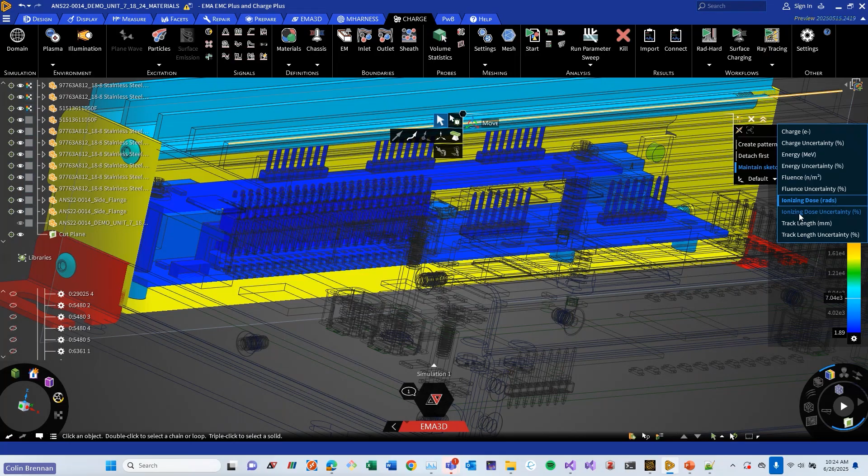But there are a number of quantities that you get out of transport. We'll show you not just your dose, fluence, charge, and energy, but we'll also show you the statistical uncertainty that was accumulated in each probe. So for example, I can look at the uncertainty in my dose, and just give that a second to update. And we can see kind of a heat map of where our uncertainty is highest in the geometry.

So for example, it's pretty quick to identify that some of these smaller components and some of these pins are as high as 60% uncertainty with the statistics that we accumulated. And this helps you identify, for components which you care about, did we get enough statistics to be well converged and thus to make good conclusions.

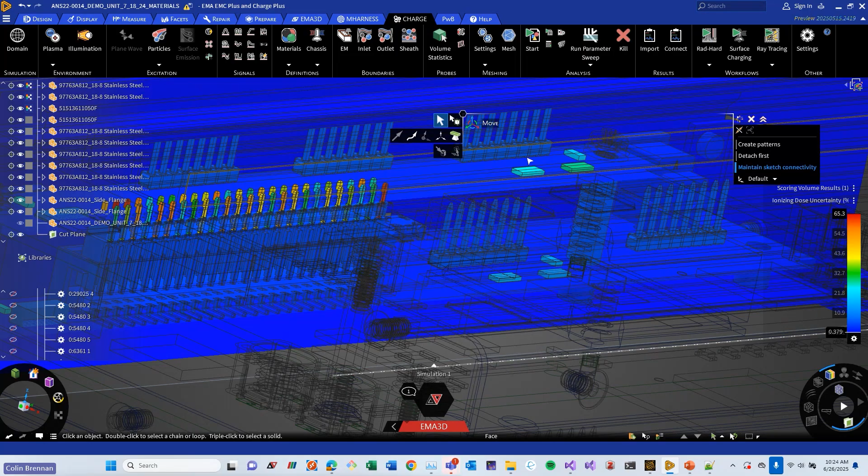You'll see that this chip underneath this cage also was pretty successfully shielded by that lead layer that we added, and kind of so on. I wanted to show a quick comparison between the Monte Carlo results and the ray tracing results, just to kind of show apples to apples. And so I selected those 11 components that I put ray tracing probes on. We're going to do a comparison between the ray tracing dose and the Monte Carlo.

This is just kind of a simple table. We see part A is that chip that's kind of underneath that lead patch. Pretty comparable results, 45 rad, 33 rad between ray tracing and Monte Carlo. These two chips, they're very similar parts, just on the top and bottom boards. Pretty consistent dose between ray tracing and Monte Carlo, especially the relationship between the two parts.

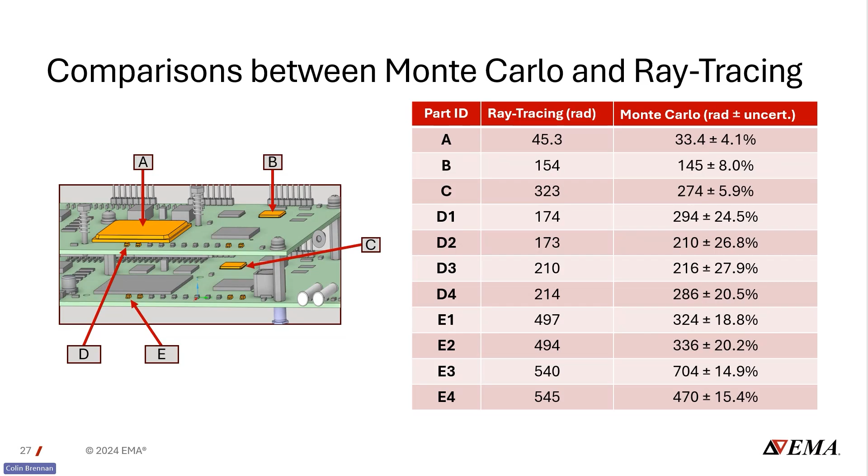So in this case, we were seeing up to like 20 to 25% just running a billion particle histories, which may indicate a need to kind of refine our statistics. But in either case, there's still some interesting trends. We can see that both the ray tracing and the Monte Carlo agreed on the fact that the top row of transistors and the bottom row, there's a pretty significant difference in dose between those two cases, and roughly a factor of 2 between them.

So as I was alluding to, this is a mistake on the slide. This should be 1 billion, not 500 million. But we still have significant statistical uncertainty in some of these parts. In the worst case, 20 to 30%, which is, I think, too large of an error bar to make strong conclusions.

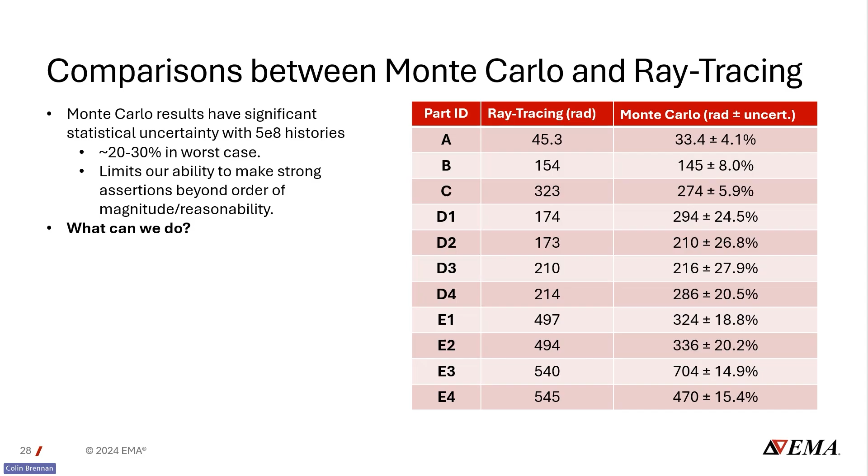So what could we do at that point? It's not a trick question at all. We should just run it with higher statistics.

To give you a rule of thumb for how many statistics to add to achieve some target uncertainty, you can make a pretty accurate prediction of how increasing statistics by some factor should reduce your uncertainty. It should reduce the uncertainty by the square root of the factor that you increase by. So in this case, if I want to achieve less than 10% uncertainty for my worst case volume, which was D3, I need to improve by roughly a factor of 3. And so I need to refine by about a factor of 10. So instead of running a billion statistics, I need 10 billion, which is pretty feasible if I just give it more cores on my desktop and let it run a little bit longer.

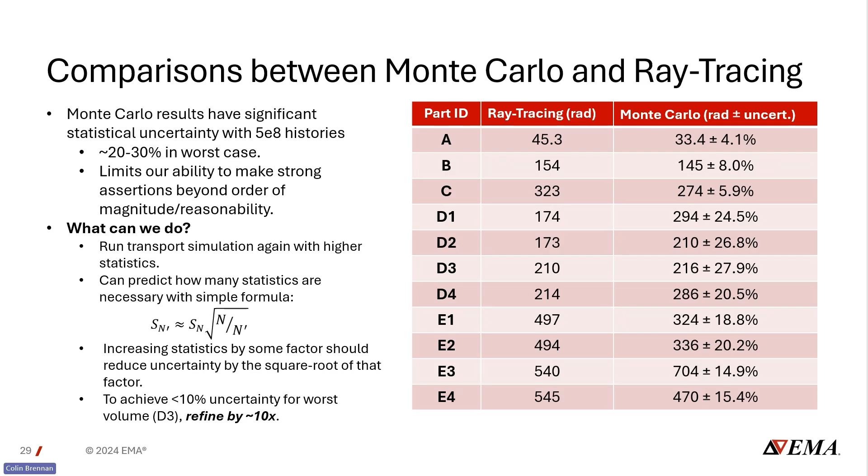It's kind of the decision-making process that you would make here. So yeah, I think that is the last slide I had.

Upcoming things to look out for: over the next 6 to 12 months, we have a lot of exciting things coming down the pipeline that we want to develop for our radiation hardening. One is we want to bring in some packages for doing single event rate predictions, and also some physics lists for doing GPU accelerated electromagnetic physics.

And then there's some improvements we'd like to make to our scoring volumes. We'd like to add some more quantities. And one thing you may have noticed with the scoring volume visualization for the transport is that for that workflow, we attach those probes to every single body, which is fine. It doesn't really impact runtime, but it can make it a bit tedious to visualize because, for example, the enclosure is included in that rendering and can make it hard to occlude and see some of the components. So we'd like to give you a bit more control over that.

So those are kind of the things to look out for, not in this release, but in upcoming releases, some exciting stuff that we have coming. And with that, I think we're just at exactly an hour and a half, so I'll get back the time for questions and answers.

Then I can also show things in the UI if people are interested in seeing how to do certain things.

Sounds good. Thank you, Colin. Maybe we can take some time now to go through questions, and then if we get through them all, we can look back at the UI while people think of more.

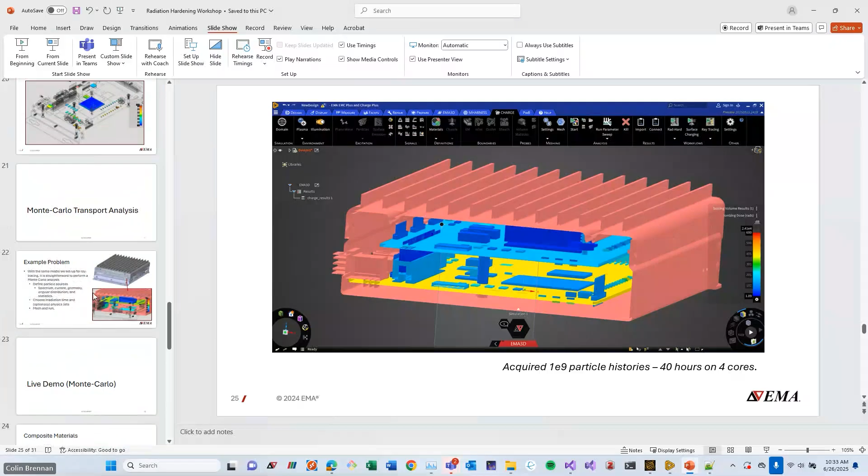There are two possible answers. For the curve that I showed in the PowerPoint, if I go back to that, I'm assuming it's asking about these trends up through the first 100, or I guess 10 microns, for both the LEO proton and GEO electron environments.

And there is a small increase. There are two possibilities. One is statistical. These are really thin shells, and we may just have relatively high uncertainty in those shells that makes it appear as if the dose is increasing.

I think there's actually a physical explanation, though, that's a bit more likely, which is that there is, and this is just something that you see, dependent on particle type and energy. You'll see buildup of dose over very short extents of shielding.

This is something you learn about if you take a health physics class or a radiation shielding physics class—I learned about this in university. Over that short range, you start to produce, for example, these electrons as they collide at just the surface, and they'll pretty quickly start producing a large amount of secondary photons, which will transport a short distance and deposit energy. So it's very common, especially for charged particles, to actually see that very short range increase in dose.

I don't know if that's exactly what we're capturing in these plots. I don't know if this is the correct buildup range for this energy spectrum, but there is a possibility that this is explained by physics. I hope that answers the question.

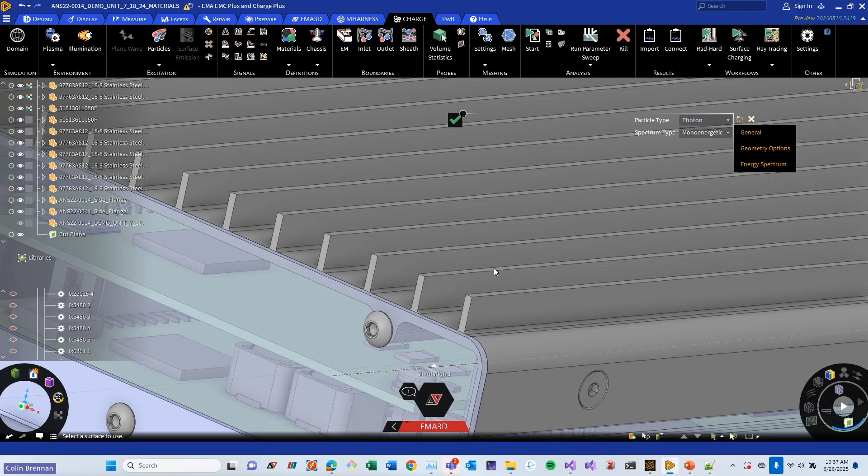I'll bring up the UI. For the rad-hard workflow, extrusion meshing is a pretty particular case. If you have some CAD like this that you'd like to import, you'll just want to use the normal meshing—you will not want to use extrusion. In that case, you would just use the global settings and pick either facets or Discovery 2D.

Or if you're doing internal charging for this kind of model, you'd want to use either Discovery or a legacy option. Extrusion is ideal for cases like simulating the dynamics of a cable in Charge, where you have some cross section and you'd like to create hexahedral elements along the length of the cable. There are very particular geometries where you'd want to use extrusion, but for general applications like this type of analysis, you'd want to just use the default settings.

Thanks, Colin. Next, we have: how does the STK integration handle lunar orbits or lunar surface environments, where there are no trapped particles and the effects are primarily from SEP/GCR?

Oh, that's a good question. This is something Kevin and I were discussing earlier. At the moment, I think our STK integration in the current builds of the software will only pull in electron and proton environments, and currently does not pull in galactic cosmic rays and so on. I am unsure whether STK provides those environments.

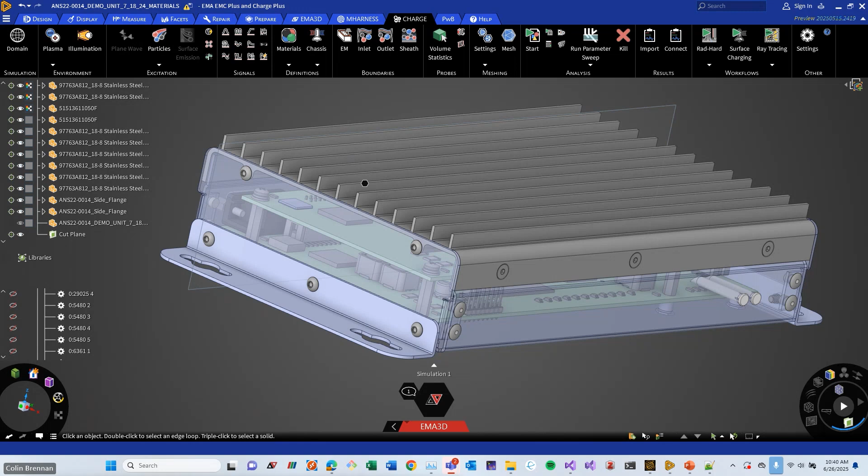Next, we have: is it possible to add a custom material or complex material, including composition ratio of different materials? Yes, I have a slide on that I skipped over. So because we are a wrapper for Geant, you are able to define materials using the typical syntax for Geant, and there are a lot of materials out there that you can find from CERN on the syntax for those things. At the moment, there's no UI support for creating composites.

But you can easily create them by going into your exported GDML, which is the input file that Geant uses for configuring the transport simulation, and add in composites. For the simulation run for this demo, there were some stainless steel components I included, and I created a stainless steel material in that input file.

And the syntax is pretty straightforward. It's very similar to what you would do in something like MCNP, for example, where you declare the Z number you'd like to include, give it a label, and that can be used for either mass or number fractions for creating a composite. It just requires some manual editing of your input file, but it's not too difficult to do.

Could you elaborate on the planned SEU rate predictions? It's very early stages for the SEU stuff. We've done a lot of literature review and assessment of packages that already exist for Geant-based applications.

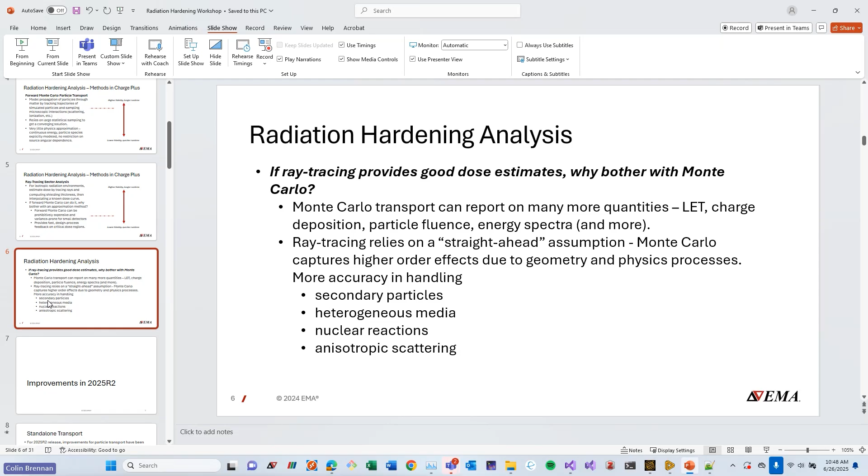Our next question: in the comparison percentages shown in the slide, which environment did you use - GEO, NRHO, or something different from DSNE? For the workshop material we showed today, we used the DSNE geosynchronous electron environment, and the reference for that is here.

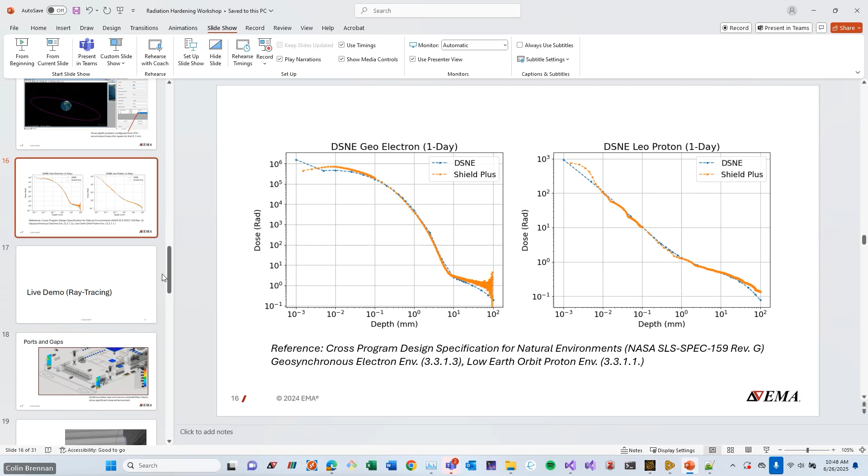I think there's a misunderstanding of the results you presented. The percentage you're presenting is not a percent difference between Monte Carlo and ray tracing - it's a percent error on the Monte Carlo result based on actual physics and statistics. Yes, as Kevin said, in this table these are not percent differences, they're for the Monte Carlo simulation. Depending on the number of simulated particles deposited in any given body, we can calculate a statistical uncertainty in the quantity we report. So it's a reported value with our uncertainty.

Do we require a separate STK plugin for Shield Plus? Yeah, Shield Plus is a separate installer for STK - it's a plugin.

Has the mesh engine changed in this demo version from 25R1? When I tried to run a similar case to the STK shell demo, I got mesh errors trying to model a thin layer with many layers - is this easier or more robust in the upcoming version? Yeah, some of the new meshing options we developed for the decoupled transport will make those kinds of cases much more consistent to mesh. If you're having difficulty in 25R1, I'd give it a try in 25R2 and see if you have more success. The bulk of the issue came from requiring volumetric elements to be generated in 25R1. This new meshing workflow allows you to only save and use surface elements to solve the rad-hard problem, making it easier to mesh, especially when geometry is intricate and layers are thin.